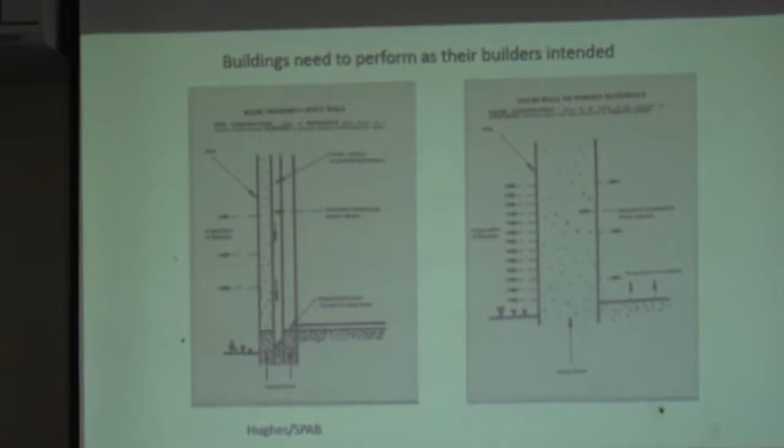What do you mean by capillary? Sorry, what do you mean by capillary closed? Well, they put in ingredients that disrupt the pore structure so water will not move out by capillary action, typically it will stay there. And what is vapor permeability? Well, the movement, the idea that a water vapor molecule will pass through a porous material, which in and of itself defies the laws of physics.

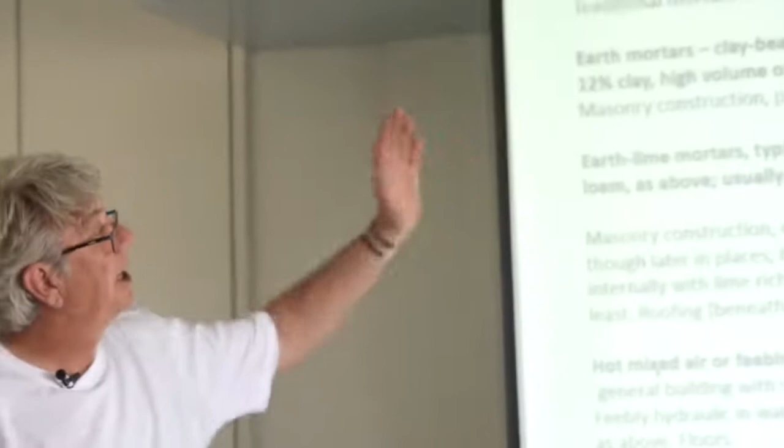So this is quite an important thing, but this would be my summary of the traditional mortars in a general sense. Obviously earth mortars, very common over millennia—clay-bearing subsoils, improved, I still use that word, with well-tempered loam, improved with sand typically to reduce the clay content and the shrinkage. Typically about 12% clay, with a very high volume of silt, which I believe is as important to performance as the clay. Used for masonry construction, plastering, daubing—if you plastered with mud, it was called daubing in the UK—and floors, perhaps with additives, often without.

More particularly, a mortar largely ignored by the conservation industry in the UK until recently is earth lime mortar, which has a small—typically small, but not always small—proportion of quicklime added to it. This transforms an earth mortar, which is not a bad mortar, into a wonderfully workable, cohesive, adhesive, and much more water-resistant mortar, but also very high in its capillarity—a very optimal capillarity. And that's for the same purposes.

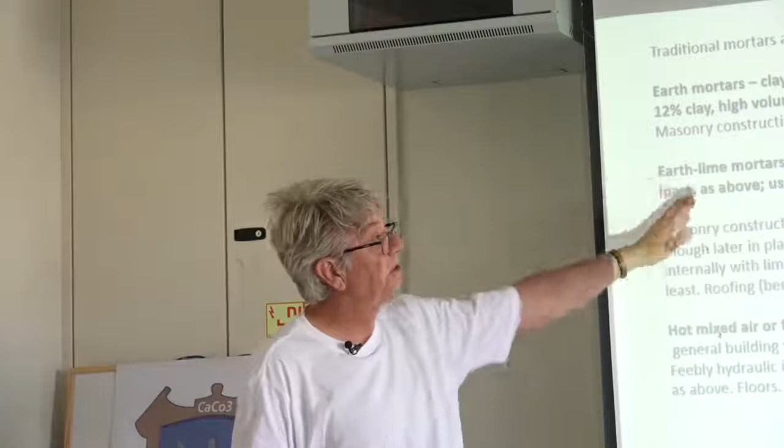Most stone buildings in the United Kingdom built before 1800 were built with earth lime mortar—the bedding mortars are earth lime mortars. In terms of historical time, there's no question the most common masonry mortar is earth lime mortar, not lime sand mortar. In terms of surviving volume, we have a high volume of buildings built with lime sand mortar in the UK because they're newer. But if we mean historical time, this is key—this is the typical Roman mortar, Norman construction, and all of these things. It's the most common mortar.

But in most cases, almost universally in the masonry trades, you don't just leave that, although it is incredibly durable on its own. It's pointed with a very lime-rich mortar, often a pure lime and hair mortar, or a lime and limestone dust mortar, or a stone mix, but always with more lime than aggregate. So those are very common.

Then we come to hot mixed lime. Understand the definition: an air lime, a fat lime, a pure lime—they're all the same thing, but the current European nomenclature says we should use 'air.' Historically, natural hydraulic limes were called water limes. So, air lime, water lime—it tells you where they belong. Fat limes belong in the air; water limes belong underwater or underground, where fat limes will not set. Simple as that, because they rely on carbon dioxide.

Hot mix and these earth lime mortars were displaced for building in the UK after about 1800, sometimes after 1850—it varies around the country. Then you've got a whole system built with hot mixed lime mortars, very lime rich, never leaner in use than 1 lime to 2 after slaking—never leaner. One of the biggest mistakes we made in the lime revival was to mix 1 slaked lime to 3. That's a non-existent mortar historically. It does not exist.

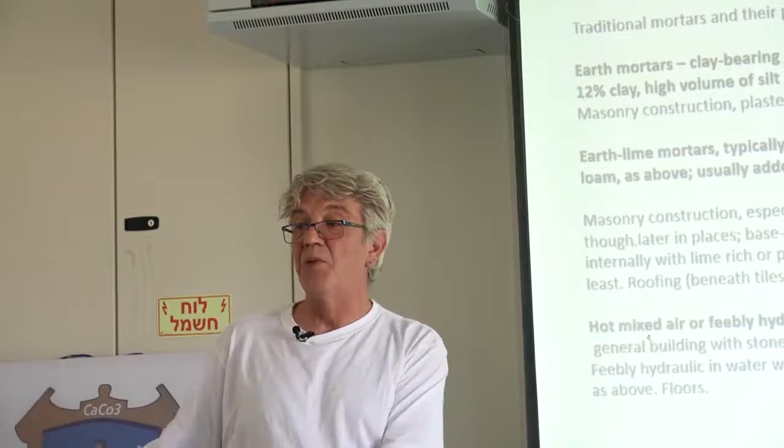They are only ever, the leanest they are likely to be is 1 to 2, and they'll only be richer in lime than that, not leaner. That is essential. It's why lime putty got a bad name in the UK and elsewhere - not enough lime. We thought we knew better, ignored thousands of years of history, and put half as much lime as they ever did into the mortar, then wondered why it doesn't quite work. That's modern arrogance, isn't it? We know better - but we do not know better in the case of lime mortars. We really do not know better.

So, and they are all universal. I would hazard that 95% of building mortars in the UK until around 1910 were made by this method, by a hot mix method, and from quicklime. So them, and then putty lime.

Now, shock horror, this was a shock to me. Putty lime slaked with minimum volumes of water, very differently slaked actually to the way it tends to be slaked today. I think I would call modern putty lime yogurt - lime yogurt, maybe Greek yogurt to be fair, but that's about it. Lime putty, when described historically, is always described as being of a bread dough consistency. I think we can see that's a different material.

And the difference comes from the method of slaking, as it does in all of these things. That was used on its own as a mortar, not as a binder - it was distrusted through time as a binder. This is a shock - to me it was too. I didn't expect that.

So in the 20th century it did become commonly used, but typically because they knew they were going to gauge it with Portland cement. If you make a cement lime mortar with lime putty, it is beautifully workable. If you make it with hydrate, not nearly so workable. So it was used for the finest joints in stone ashlar, the finest brickwork joints, and for the finish coats on lime stucco.

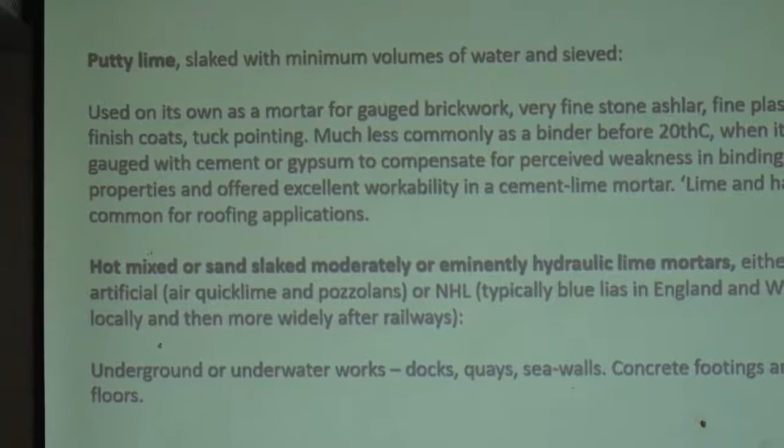So that's that point made. Lime and hair, but for roofing applications - but again, that was slaked and used immediately. In most cases, when they used lime putty, they would slake it and use it within a week, not 3 months. Their belief was the longer you laid lime putty down for, the weaker it became in its binding properties.

And there is modern research that indicates that that is true. You'll see that with the hot mixes, the bond within the mortar is completely different. It's a very tenacious bond within the mortar as you're using it, as you're making it. Very different. So it's not a bad material.

I mean, if people want to carry on using lime putty on historic monuments, great. It's a very sacrificial material, but I think in masonry terms and craft terms, maybe a little too sacrificial, perhaps, you know. It lets more water in, particularly when it's too lean in lime.

And then we've got hot mixed or sand slaked, moderately or eminently hydraulic lime mortars. I would say right now that a modern NHL2 is not a feebly hydraulic lime. By historic definitions, by Vicat's definitions, he would have called a currently available natural hydraulic lime an eminently hydraulic lime, okay? Where that leaves NHL5, I don't know. But as you will see later today, in many of the brands, the NHL2s are the strongest, not the 5s. This is one of the problems - you don't know what you've got in that bag.

But they were used underwater. Our blue lias, which was considered the hardest natural hydraulic lime available for engineering works, that was 72% free lime.

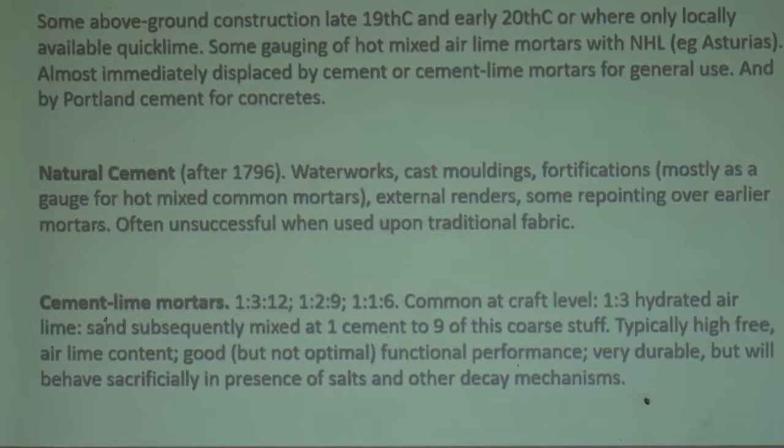But I have to say, the evidence of all my research is that the only purpose for which natural hydraulic lime was the preferred binder in the UK, and in Europe generally, was to make concrete. That was the only purpose that they preferred to use it for.

So for those conservators, and I'm one of them in the room, we have to ask a simple question: why have we spent the last 25 years covering our buildings with a material that historically, and still at the end of the 19th century, they considered to be only appropriate to make concrete floors and concrete footings of buildings, and rammed béton in France, rammed concrete structures? I'd leave that question in the air.

And then natural cement after 1796, but that again wasn't used for building. No mason would use that to build a structure with. That's far too hard, far too fast setting, but it was useful for waterworks because it does set underwater very quickly, and mainly for cast mouldings.

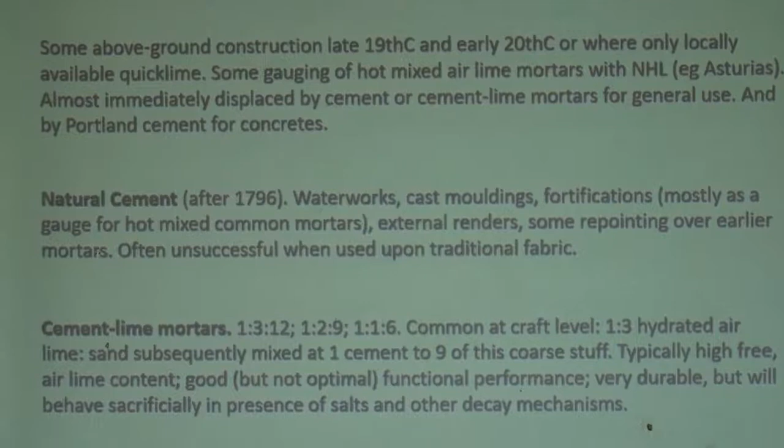American engineers liked it for fortifications, but they were building these during the Civil War. They needed them built and strong from the moment they were built. They didn't have time to wait. But even then, they used hot mix mortars, generally lime rich, and they would gauge with natural cement to speed that initial set. Never use it on its own for that purpose. But they would often point with it on its own.

And we are in the period where I believe we do need to consider cement lime mortars to be historic mortars, and that where they exist and where they're causing no damage, which they will rarely do, in my observation—a 1:2:9 or a 1:3:12, 1:1:6 is a different matter, perhaps—we need to be working like for like with these materials.

So in Tel Aviv, we've got very successful cement lime mortar work that is being displaced by other mortars. Why? The like for like material is cement lime. And a typical cement lime, or a 1:2:9, has 66% of its binder as air lime. There is no natural hydraulic lime on the market that has that much free lime in it.

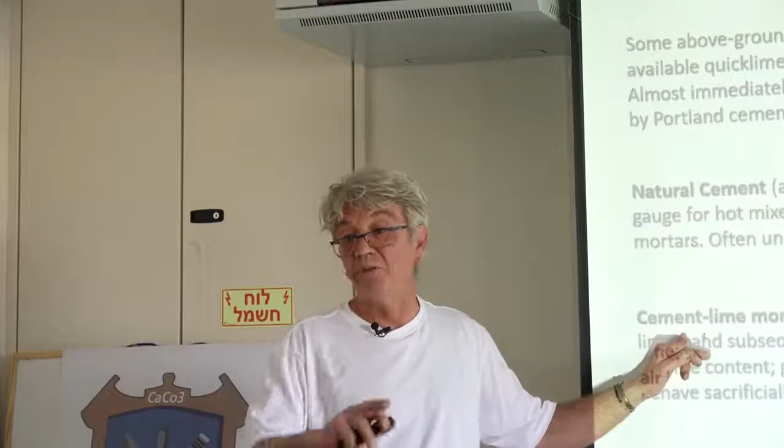And the other thing to say, as I will demonstrate later, the key issue with natural hydraulic limes—one of the key reasons they were never used for building unless they had no choice historically—is that they are an inherently variable material, not only between sources, but within the same quarry. They vary in strength all the time from one day to the next. Portland cement, which is mineralogically... put it another way, a natural hydraulic lime is actually a weak cement lime mortar. That's what it is. It should be, in my opinion, called a natural cement lime mortar, not a natural hydraulic lime mortar.

But they are predictable. We know exactly what the strengths will be. We also know that a typical cement lime mortar will reach maximum strength after 3 months, not after 10 or 20 or 30 years. We know pretty certainly that NHLs will gain strength for 10 years at least after they've been in a wall, and on it goes. We don't know.

That's the whole point, we don't know. Isn't that the basic rule of conservation? We don't use materials that we don't know the potential of, the consequence of. So we need to take these seriously. They are well-performing mortars, and they were designed to be exactly that, initially by the United States Bureau of Standards, who recognized the need for as high a free lime content as you could get, but compromising with modern building technology and the demands of the modern building industry that did demand rapid early initial set. That's all it's about. They're often weaker than if you used a straight pure lime mortar. 1:3:12 is unquestionably weaker than a 1:3 hot mix lime mortar with no hydraulic activity at all. But of course, the hot mix will take more years to get to that strength. That's the difference.

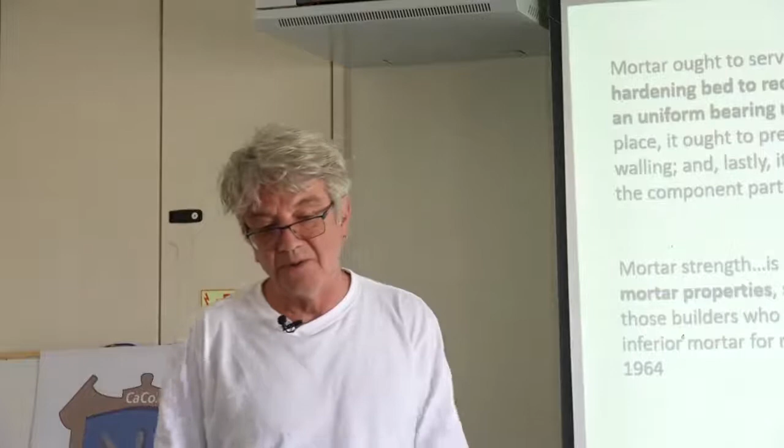So, okay, I want to initially go through—forget all that, this versus that. What we actually need to look at is what mortars are actually for.

What does a mortar need to be to do the job that is asked of it?

Looking at historic understanding of this, mortar ought to serve at least three purposes: to form a soft but gradually hardening bed, critical, to receive the various building materials so that these shall obtain a uniform bearing notwithstanding the irregularity of their surfaces. We'd add now that a soft but gradually hardening bed is essential to the formation of the bond with the substrate.

In the second place, to prevent the passage of wind and rain through the joint. Even the US Bureau of Standards acknowledge that the mortar that will keep the building driest, that will resist rain penetration most, is a pure lime mortar, because it makes a proper durable bond that prevents water getting in. And the more hydraulic that mortar is, the less it will resist the penetration of water.

Counterintuitive, but that's all to do with bond and the quality of the bond that is made.

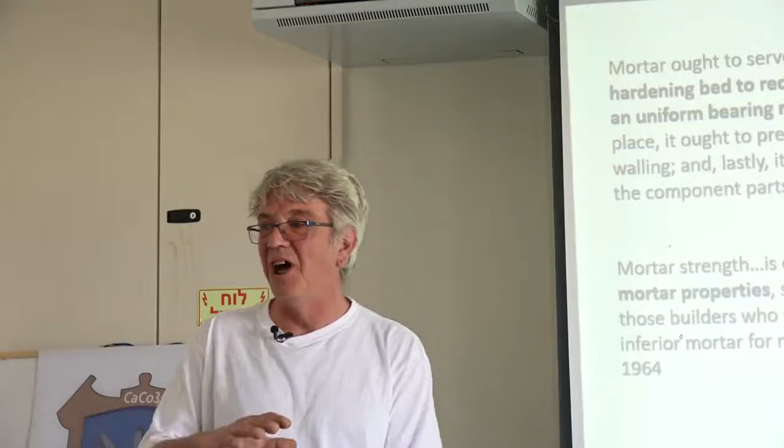And lastly, to have adhesive and cohesive strength enough to bind the component parts of the wall into one solid mass. Not, as some engineers frustratingly say - even friends of mine - that the purpose of mortar is to hold the stones apart. I'm a stonemason; you can build a wall dry and it can still be structural, but it won't resist the things we want it to. So mortar is to hold stones together, not to hold them apart. That gives quite a misleading impression of what mortars are for.

Moving to 1964, Robert Boynton, American chemist - any work by him is fantastic - wrote that mortar strength is often greatly overemphasized to the detriment of other essential mortar properties such as workability, water retentivity, and bond strength. He doesn't mean strong bond strength, he means appropriate and full extent of bond. Those builders who strive for high or maximum mortar strengths usually obtain inferior mortar for normal above-grade construction. Again, we're talking largely about above-ground construction.

In the UK by the 1920s, it was asserted that you could not build a building with fat lime mortars, ignoring the fact we'd been doing that for 2,000 years at least. That was propaganda, ideology, all sorts of things. But the US Bureau of Standards were unusual in that, as long as the wall was thick enough, they were quite happy for it to be built with a pure lime mortar, no hydraulicity at all.

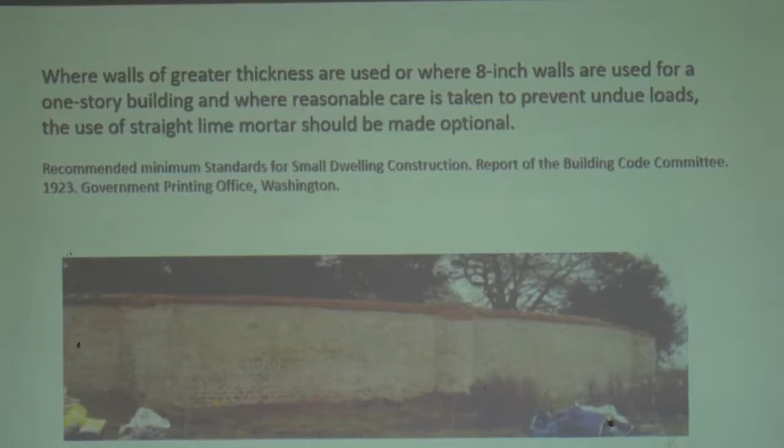This wall we rebuilt with just a 1-3 hot mix, no pozzolans. The only thing that stopped me building it faster was the time I had. Hot mix mortars receive the stone and stiffen to load-bearing almost immediately, so you can just keep building. You shouldn't go too high in one go for structural reasons, but you could build the whole thing in a day with hot mixes if you had the people to do it. That's a huge quality in a building mortar.

This is dry. There's a bit of green there, but that's because we'd just taken away the scaffold that had been there all winter. The scaffold was hay bales - a big arrangement - so it had been holding moisture against that wall, but it's very dry now.

More surprisingly perhaps, this is the modern ASTM international standard for mortars: workability is the most important property of plastic mortar. Workable mortars can be spread easily with a trowel into the crevices of the masonry unit. Workable mortar also supports the weight of the masonry units when placed and facilitates alignment - pretty much what's just been said. It adheres to vertical masonry surfaces - you butter a perp joint and the mortar actually stays there. What a revelation, instead of just falling straight off again. So you can press your next stone into that mortar rather than trying to retrospectively fix it, which people often don't do properly.

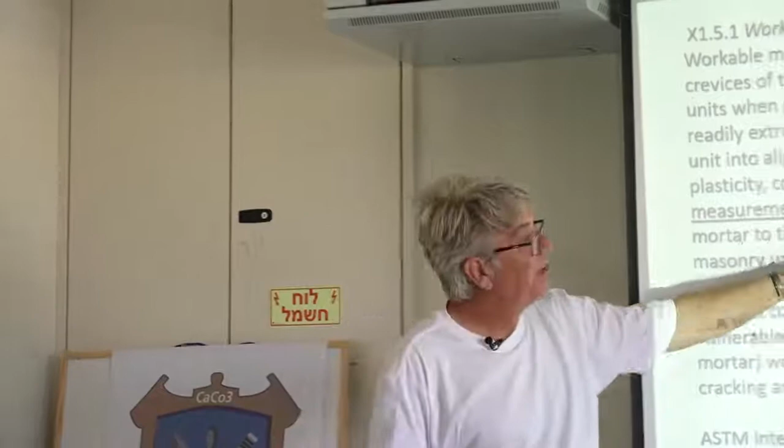Beware of this, it's very, very common. And I like this line: the mason can best assess workability by observing the response of the mortar to the trowel. Good workability is essential for maximum bond with the masonry units. I think a lot of professionals don't understand that workability is critical to everything. They think it's just something nice.

We've got lots of conservation firms in the UK, masons and others, who have never used anything other than natural hydraulic lime. So they don't even know what workability is, because theirs are not workable mortars, in my opinion. They feel like sand and water on my trowel. That's not a workable mortar. They feel like cement, the same.

I'm coming to why that is, but so a wall containing, this is again the ASTM standard, a modern straight Portland cement sand mortar would be strong but vulnerable to cracking and rain penetration. A wall containing a straight sand-lime mortar would have lower strength, particularly earlier strength, but greater resistance to cracking and rain penetration. This is the modern American standard.

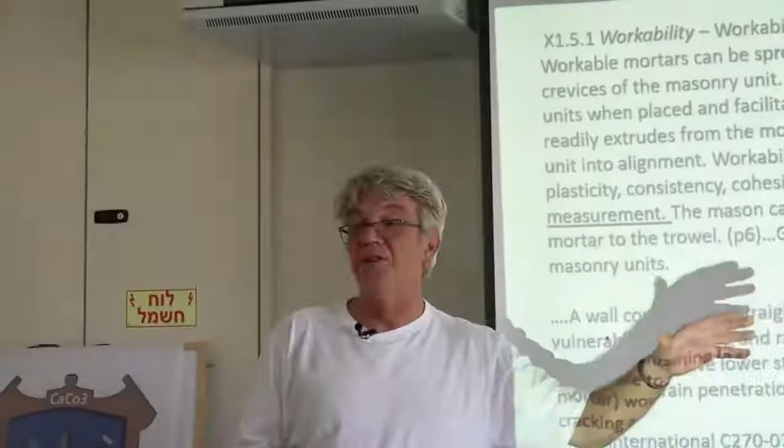Here we are over in Europe and the Middle East, we somehow think we know more than the Americans. I'm telling you now, in terms of standards and mortars, the Americans know far more than any of us, in truth, their essential nature. And that is the legacy of the United States Bureau of Standards research done back in the 1920s and 30s.

That's still running through the buildings industry in the USA. I'm not saying they do this, I'm saying they understand the importance of it. Now, why is workability important? It's not just something nice to have, because workability indicates the key property of water retentivity, which is the resistance of the mortar to letting its water go straight away into the substrate or into the air. And if you don't have water retentivity, that happens.

We know NHL mortars dry very fast. In doing that, they tend not to have made a bond, because the water, and they are hydraulic, so their set relies on water. You put a porous brick to a non-retentive mortar, it will suck the water out of the junction straight away, and that mortar at that junction will not set properly, ever. And it will leave a capillary pathway for water to run through.

The other thing is, if they're not water retentive, cement will make a strong bond, but only here and there. It leaves gaps, it doesn't make a bond everywhere. The US Bureau of Standards went through this ad infinitum in the 20s and 30s because they were trying to understand why their brick buildings of solid wall construction in America were leaking like sieves for the first time in history, having just been built with cement sand mortars.

The absence of workability affects workmanship. The absence of water retentivity prevents their ability to make a proper bond and a full extent of bond. A water retentive mortar does make that bond because it's slowly letting that water out. And suction, again, with 25 years of natural hydraulic lime use, we kind of see suction from the fabric as our enemy.

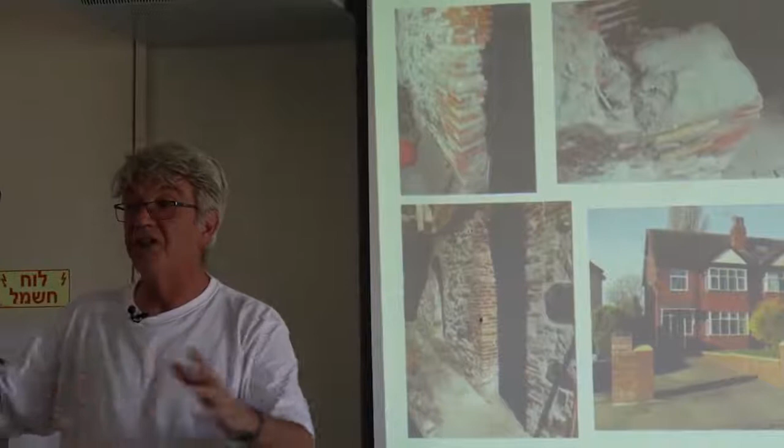And to a lesser extent, but to a relative extent, NHLs are exactly the same. And I did do it - I rebuilt it with a hot mix there, and so on.

And the other thing that they talk about, and that Boynton talks about, is the durability of the bond. Not that the bond is durable in frost and all that, but that once that bond is made, it doesn't break, that it stays there.

And this is a cavity wall construction, 1950s in the UK, so 1950s, hear that date. There is a hot mix air lime mortar that it was built with. It's in perfect order. That recession is not erosion, that's just the style by the 1950s - leave the mortar back a bit. And that bond is fully intact. And that building is dry.

This one next door, built with the same materials but repointed with cement, is permanently wet. This one is permanently dry, and that's the difference.

Another reason - even if they haven't made a proper bond, a mortar without water retentivity will break its bond because if it's hydraulic, because of the nature of hydraulic materials, every time a cement or a highly hydraulic material gets wet, it expands a little bit and then it shrinks. It expands and it shrinks, and it does that in every rain cycle. It also does similar in every thermal cycle.

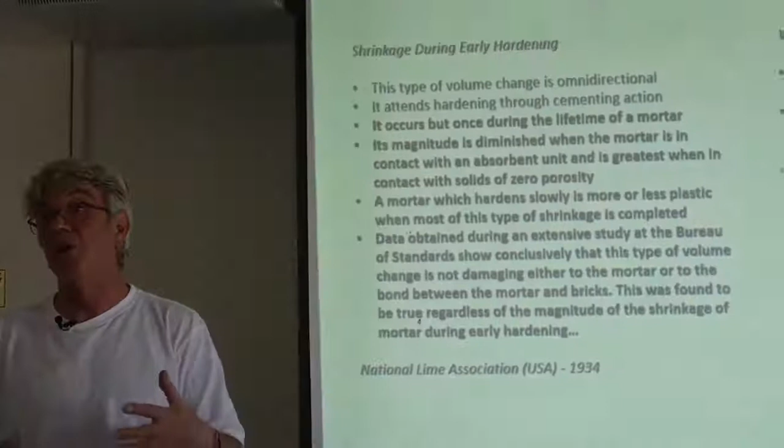And typically it doesn't shrink, that doesn't move forward - it's a lateral shrinkage pattern. With hydraulic materials, and of course relative to their hydraulicity, they demonstrated, and we know this, we all know this, we see cement renders full of cracks. That's not because of mechanical movement, that's because of the nature of the material.

They will shrink up to 4 times that same volume that we get in a fat lime mortar in their lifetimes, but only after they have set hard, when there's nothing you can do about it.

So I said earlier, I just want to say, well, these are what we do with these mortars, these are what they're for, which mortars actually meet those criteria. And I have to say, in summary, I'm not sure I've finished yet, but in summary...

Air lime mortars and hot mix lime mortars and fat lime, lime-rich mortars - doesn't have to be a hot mix. That's not essential, that's just the most efficient, economic way of making the best mortar in the world, that's all. So I'm not biased, but they don't have to be.

So that's where we need to hold these mortars up to these criteria, because the purpose is surely that the building doesn't crack and that it is dry most of the time. That's what they are supposed to be, isn't it? We've forgotten what they look like in Britain.

And just an extreme example of that, this is the Atlas fountain at Castle Howard. Obviously we didn't use hot mix air limes when we repaired this building, but in 1982 they filled this - on the elbow of this Triton here - they filled that with a neat cement. Logical, it's a fountain, you have to use neat cement, and the expansion and contraction of that in what we can't deny is a very wet environment.

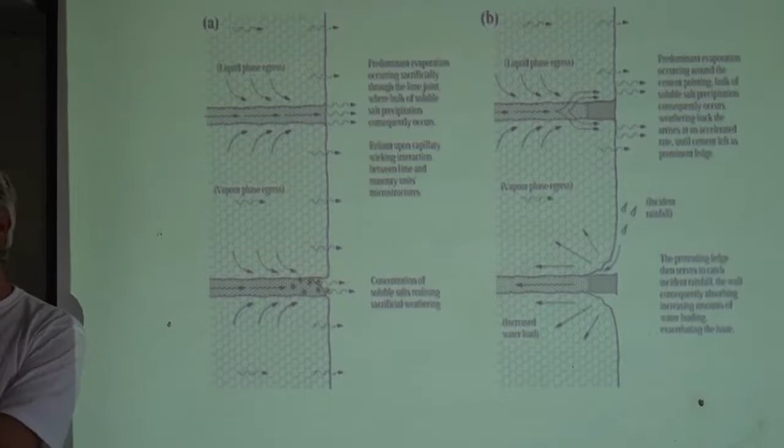This is David Wiggins, the engineer who's one of our gang. But if you plug that, what we need to happen is any water hitting that building - and the thing about capillarity - the air pressure within that pore structure will resist the penetration of water beyond about that limit.

So in a capillary active mortar, received water cannot get very far. And all of us who work on building, we know this to be true, even if we haven't taken it on board. We spray the old mortar joints, if it's NHL, for as long as you possibly can to give yourself some insurance against it drying too fast. And if we dug in with a mortar pick, we'd see the water has only gone that far - we could have stood there with a hose pipe for an hour, it's still only gone that far because the air pressure within resists. This is physics, not theory, not opinion. These are the fundamental laws of physics.

So that's what we're seeing in operation. Water going in here, but water is received in other ways too. If it's in the wall, it needs to be got out as quickly as possible. So with a bigger pore size distribution, it's going to want to go into the most capillary mortar part, and that's the definition of sacrificiality - any salts or whatever are captured in the face of this mortar. But it needs to be capillary active for that to happen. It's not enough to put something in and say 'oh, we'll resist the salts' - they're still there, and they're going to come out through the stone if they can't come through the mortar.

So we all know this, don't we? But sadly, the materials we're using don't kind of know it sometimes. So this is the thing.

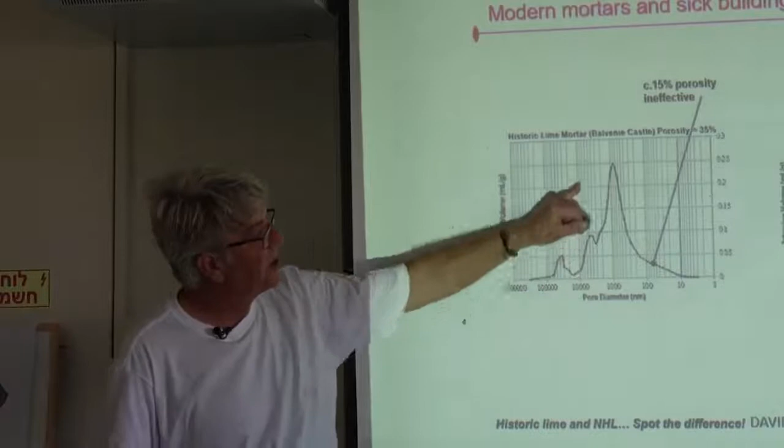So this is a graph of the pore size distribution in a historic hot mix lime mortar - very high domination by 1 micron pores on either side. This is an NHL 3.5 pore size distribution - here are the 1 micron pores. I'm just going to ask you to compare the relative volume of those capillary active pores in that mortar.

And of course, St. Astier used to - I don't think they do anymore, funnily enough - but they used to have on their adverts 'low free lime, low capillarity' as if that was a selling point, a good thing. It's a really bad thing, but they're not wrong - theirs is, as I say, the softest on the market, actually. So this does get worse, prepare yourselves.

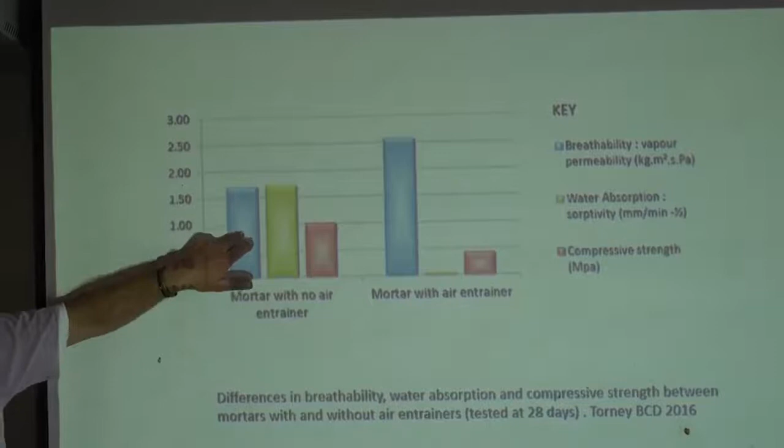And as this graph shows, here we've got capillarity and vapor permeability, which is something to be demonstrated in the lab only, but has been used.

Chemical additive? Yes, it was soap, basically. Builders used to use washing up liquid, because it creates big bubbles. Which they say makes it frost resistant, because the expansion of an ice crystal is smaller, but the trouble is, water loves to sit in big bubbles, in big pores. It'll put its feet up and read the newspaper. It doesn't want to get out, whereas it wants to get out of a very small pore.

So this is just showing what happens when you add air entrainment. It increases vapor permeability in a laboratory. I mean, the test is entirely false. They suck or force air through a porous material, usually with a vacuum on one side. Well, we don't live in a vacuum, okay?

And then they say it's breathable. No, because vapor cannot move of its own volition through a porous material. So that's the capillarity, that's the vapor permeability.

I should say, if it is about vapor permeability, which it isn't, a typical hot mix has twice the vapor permeability of any other mortar in the world. So if that's all it was about, they're twice as breathable. But we've increased the vapor permeability, which means nothing, won't work, won't dry the building, and we have all but eliminated capillarity. So that is a major problem.

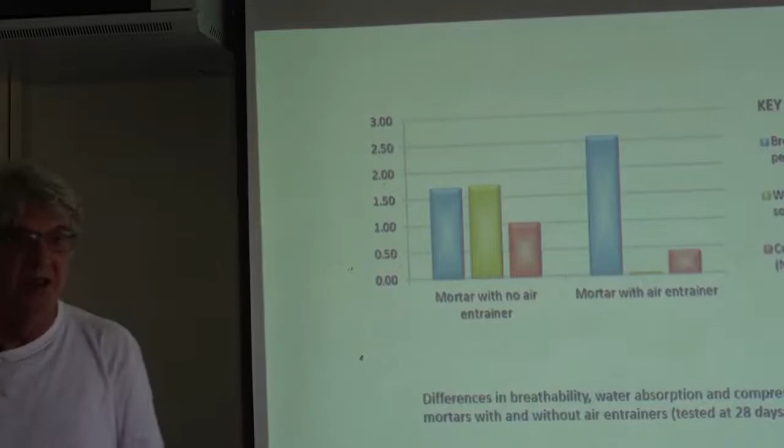And most masons in the UK put air entrainment into NHL mortars, not for frost resistance, but to try and get at least some workability in that bloody material. I don't know a builder, an ordinary builder, who does not hate natural hydraulic lime. It seems in Britain the only people who love it are the conservators. Ordinary builders despise the material, not because it's lime, but because they recognise all its problems.

That's why they did it, to mitigate. And they are much more breathable and much more capillary active, because all of this workability, real breathability, as in capillarity, all comes from the free lime in that mortar. That's where it is. It's not in the sands. Some engineers say vapor permeability is in the sand, but it doesn't work. It's the lime that gives the properties that we need, and the more of it you can get, the better.

Because of the pore size? They didn't know that, the US Bureau of Standards, but that makes the better bond and everything else.

So let's just have a look at a few examples. This, grade 1 listed, very important building, pointed 3 years ago with natural hydraulic lime, soaking wet all of the time. This humble little building, pointed by a local builder who's never used lime before in his life, but likes to use hot mixes, as is our experience.

Ordinary builders love hot mixes once they've discovered them, and once they trust that they will be durable. That's all they need to know.

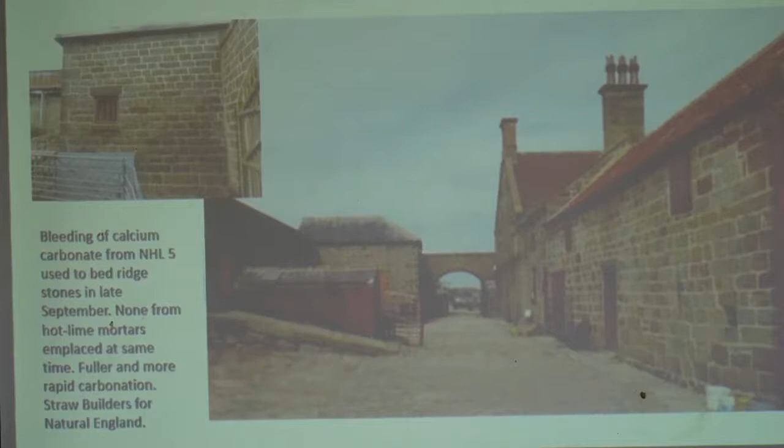We had bleed out from, the only place we used natural hydraulic lime was in the ridge. And of course, we're losing a lot of the free lime there because it's bleeding out, which is the typical pattern. The hydraulic set interferes with the carbonation set. There's no question, and so it delays it. But, and so that's that.

And these buildings had never been repointed with cement. They're earth lime built. I didn't perceive them to be especially wet myself, you know. That's that part of the range a year later. I mean, they were wet.

And that again is illustrating the dynamic nature. They didn't have Portland cement, but there wasn't lime pointing at the face. And you need it at the face so the wind can activate the capillarity. So it's a dynamic system. This isn't a passive system. This is a dynamic system when you use these lime-rich mortars.

And another example with NHL, four years ago when I did all these photos, this building is wet all the way up. And I think the guy who was mixing it just forgot to put the air entrainment in, perhaps, is all I can say.

And again, what are we going to do? What are we going to do? I did several things. I chopped out the NHL in that zone.

This was taken the next day. So the day after I'd released the capillary active mortars again, that they could get to work, those bricks dried overnight. I did a panel here across the capillary rise, so I couldn't be accused of cheating. And again, when I went in the next morning to dress that mortar back, the bricks in that zone were dry. So this is a shocking thing in a way, and the same there.

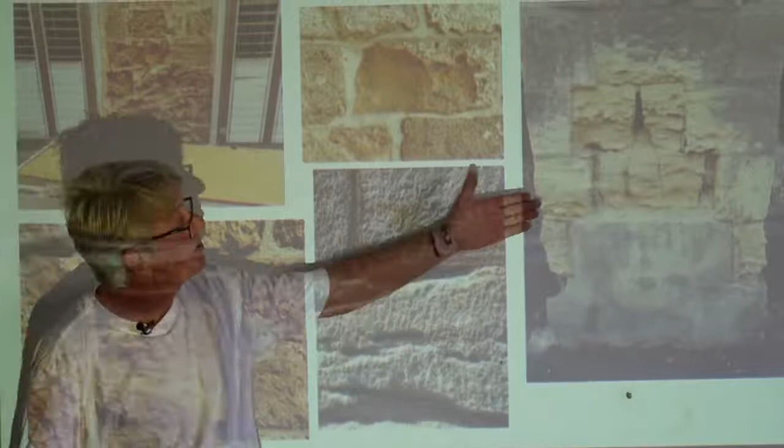That's in Moulton. This is where I live, around there. The only part of Britain where we have a calcareous sandstone. And this is in Acco, pointed with NHL, we understand, or premixes.

The biggest problem with a lot of premixes is that they have air entrainment added. There's nothing you can do about it. They add it in there, and water repellent usually. Both of those things will destroy capillary activity. It eliminates it. So you might as well be pointing with plastic, is the truth of the matter. Except plastic wouldn't make a great bond. But anyway. So this is what we expect.

Salt degradation. This is sacrificial behavior in the calcareous sandstone as a result of pointing with an inappropriate mortar. I'm not here to condemn, but I am. Of course I am. Why do I pretend, you know? But I hope it's based on evidence, yeah? And observation and experience. But that's just a little local example.

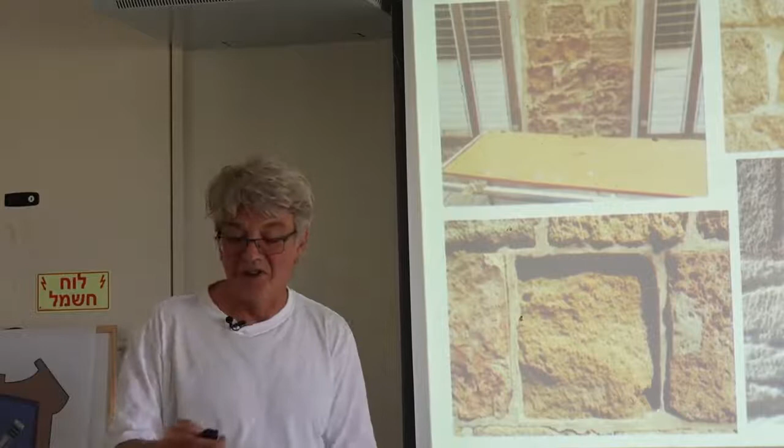Right, okay, so let's start looking at actually the mortars they used. There's Batty Langley, London, 1750. There are several kinds of mortar used in buildings, eight of them. So inside and outside mortar made of lime and sand. Now that's the general mortar. That's for most things.

Terrace mortar, which means trass mortar, they spell it all sorts of ways. Trass is a volcanic ash from Germany that has been the most commonly used for hundreds and hundreds of years in Britain and in Holland and everywhere else for underwater works, for waterworks.

Brick dust mortar, again a pozzolanic mortar. Bastard terrace made of blacksmith's forge ashes. You know, you've got iron, you've got fuel ash. These are all things that will give pozzolanic reaction, yeah.

Pargeting mortar made of lime and horse dung. And horse dung was used largely because it's full of fibre. Yeah, so it resists shrinkage and so on. But this is inside chimneys, where lime plastering inside a chimney is not going to do very well because of all the pollution and so on.

Furnace mortar for furnaces, ovens, kilns, so anywhere where there's real fire. Windsor loam - Windsor is around London. Loam is clay-bearing subsoil, that's what it means.

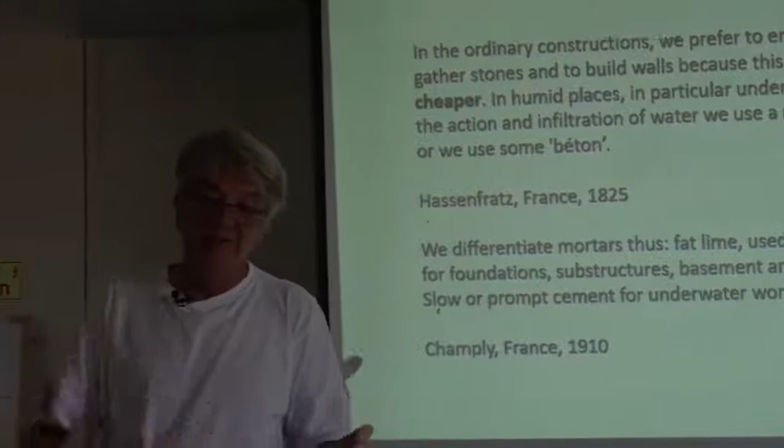So that's a British description of mortars. This is France—if you believe St Astier's marketing, France is the place where they've only ever used natural hydraulic limes to do everything. Completely untrue, as I will show you. But anyway, Hassenfratz, a French engineer, 1825. I should acknowledge that my apprentice Emma was from France, and in the course of this she translated many French texts into English that have never been in English before. So that's her contribution to this.

In fact, many of the French texts are the most enlightening, in truth—they went into far more detail about things very often. So in the ordinary constructions, we prefer to employ fat limes and sand to gather stones and build walls, because this mortar is abundant and cheaper, and it takes the most sand. We'll talk about that—the most sand is 3 parts to 1 quicklime, but that's what they considered a high sand-carrying capacity. NHLs were mixed at 1 to 1 or 1 to 2, never more.

Because in humid places, particularly underwater, wherever we wish to stop the action and infiltration of water, we use a mortar that hardens underwater, or we use some béton. Natural hydraulic lime is typically the binder in what the French call béton, but it's concrete—that's what it meant. You use the term here, don't you? I heard somebody say it. Yeah, bloody French, they get everywhere, don't they?

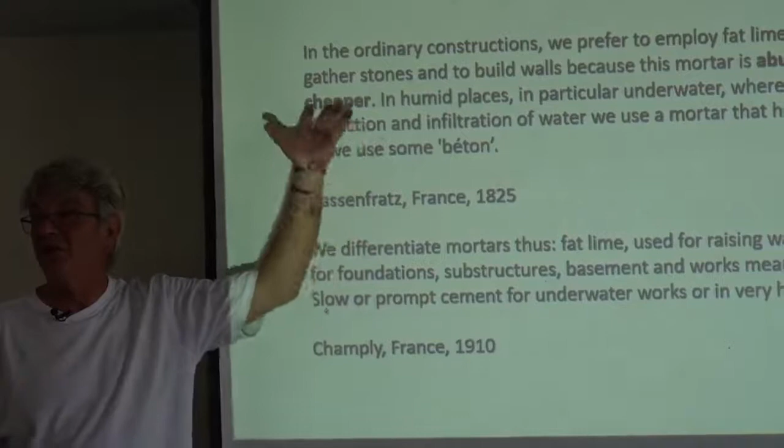But anyway, so we differentiate mortars thus: fat lime—this is Champly, 1910, not a long time ago. We differentiate mortars thus: fat lime, used for raising walls, so above-ground construction. Hydraulic lime, not necessarily naturally hydraulic, but hydraulic lime for foundations, substructures, basements, and works meant to be immersed, under the ground or under the water. Slow or prompt cement for underwater works or in very humid places.

Now, the distinction he's making here is calling Portland cement slow, as opposed to natural cement, which, as we know, sets hard in about 15 minutes—a nightmare to work with in many ways. You can add quicklime to slow that down. You don't need to add citric acid, add quicklime. That'll give you more working time and more workability.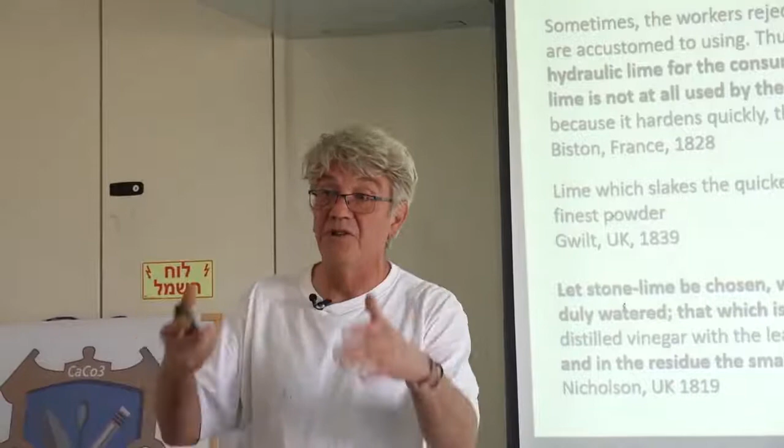But anyway, so those two quotes to me are the hierarchy of traditional building construction for most of history, and we're still obviously working then. And I said yesterday, and maybe this might be a place to pause—I fundamentally believe that traditional building technology, everything porous and capillary active, unless the stone itself is really hard and not porous, but of course the core of the wall, the mortars are, this is the best system of building ever invented.

And the full system, where we've got plasters of the same kind inside and a render, an exterior plaster of the same material, and a lime wash—that is the full system, and it's a brilliant system. It keeps buildings dry, that is thermally efficient, far more than we pretend. But of course, once that fabric gets wet, it starts to suffer problems, and it becomes thermally inefficient. It becomes all these things.

So I fundamentally believe—and of course these are sustainable—that's a sustainable architecture. It's vernacular, locally sourced, most of the time.

Anyway, again from France, and Emma, who's only ever known hot mixes, of course, and she is from Calvados—when she translated this, I got 'Wahey' in capital letters after, as she's translating it, because you see. But anyway, sometimes, I'd say every time, the engineers are campaigning for the use of hydraulic limes from Vicat onwards, for other uses, not just underground.

The crafts are resisting that campaign—that's the point, they're refusing. And this sums that up: half the lime kilns in the region of Calvados produce natural hydraulic lime, but it just gets spread on the farmers' fields to improve the fields.

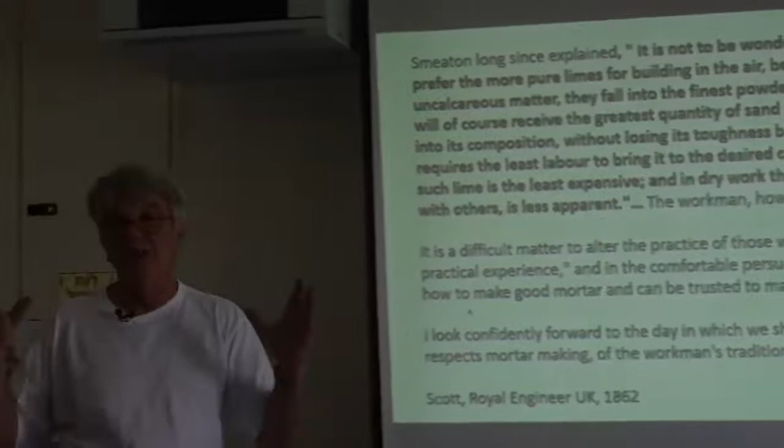And the idea that they didn't want it—I'll just end on this and we'll have a break. John Smeaton, brilliant. Read his book if you can get it: The Narrative of the Eddystone Lighthouse, one of the best books about lime ever written. He was something of a hero of mine. He's been quoted against himself here.

But Smeaton is saying: it is not to be wondered that workmen generally prefer the more pure limes for building in the air, because being unmixed with any uncalcareous matter, they fall into the finest powder, make the finest paste, which will of course receive the greatest quantity of sand—a maximum of 3 parts to the 1 quicklime, I would stress—generally into it without losing toughness beyond a certain degree compared to a hydraulic material, and requires the least labour to bring it to the desired consistency. It's the most efficiently prepared, and so on. Hence, mortar made of such lime is the least expensive, and in dry work above ground, the difference of hardness compared with others is less apparent.

This is—sorry, I normally swear there—this man, Henry Scott, a Royal Engineer who thought hydraulic materials were all you should use for everything, and who was, as so many in that period, utterly condemnatory of craft practice. Whatever they say: well, if the bricklayers do that, it must be wrong, because they're inherently lazy and idle. I'm going to tell you how you should do it. And that's a common thing that's going on in Britain after about 1860.

So he's saying it is a difficult matter to alter the practice of those who have grown grey in exalting practical experience, and in the comfortable persuasion that the bricklayer knows best how to make good mortar and can be trusted to make. This is just contemptuous sneering at the crafts. It's class struggle, that's what's going on.

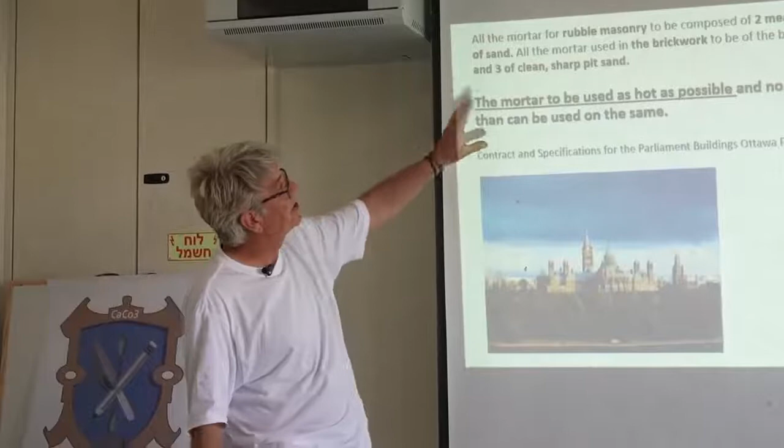And there are lots of lime premix producers now advocating the addition of latex to mortars - don't do it. But look at this spec: the mortars will be used as hot as possible, and no more mortar to be mixed in one day than can be used the same day. When you see that, you often just see that bit - no more to be mixed in a day than can be used that day.

This is the idea, common historically, that lime mortar is best when used the freshest possible after making. The longer you lay it down for, as with lime putty, the weaker it might become. Now, they might be wrong about that, but that was a firm, solid belief for 2,000 years - use it as fresh as you can.

You might interpret that as meaning it's hydraulic, but no - when they did use hydraulic limes, they're very clear: as soon as that starts to stiffen, throw it away, because the hydraulic set has started. If you knock it up, you ruin it. And if you knock it up again, as St. Astier told you to do over a 36-hour period, you might end up having knocked out a significant proportion of the hydraulicity.

So anyway, that's the Canadian Parliament building - they've just spent $2 billion repointing the west wing of this complex with a hydraulic lime that has 3% free lime in it. So they've wasted it, in my opinion. They will be back on that building in 20 years' time.

Okay, so earth mortars - we're going to scoot through this, but this is historic. At last, finally, the conservation world in Britain is taking earth and earth-lime mortars absolutely seriously. We have spent 40 years ignoring their existence, believe me.

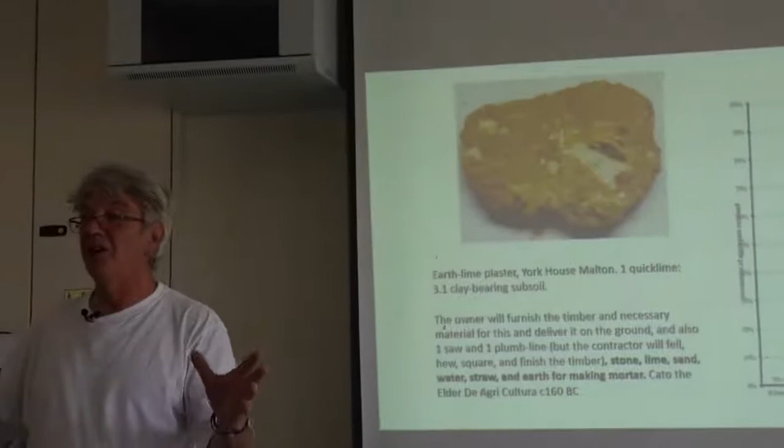This is a brief analysis of a typical earth-lime plaster from Malton: 1 quicklime to 3.1 clay-bearing subsoil - so that's actually quite lime rich. As Bill the analyst said, that is the only 1-to-3 mortar he has ever analysed in his life, because lime-sand mortars are never that lean. He's very accurate, Bill.

Whoever said that's pedantic, yeah, but essentially it's 1 to 3, more often no more than 10% or 20% lime. In Spain, most of the rammed earth structures that Valencia University have analysed have 10 or 20% lime addition. Who knew? But that's the case. It's because when you add a little bit of lime to an earth, it transforms that material into something completely different, far more workable, and all these things.

That's just some data, but a lot of these I just like, you're going to get this slideshow so you can read them. These are building accounts typically, and we only find earth lime mortars in building accounts, not experts - they didn't write about them, except the French, they did. So you can see the ingredients of an earth lime mortar being delivered to site there, and so on.

Spain, Valencia, just to give you an overview here: earth lime bedding mortars very much in Roman tradition, hot mixed lime pointing mortars over the top. Valencia in Spain - that's a 17th century merchant's house in the old city in Valencia.

This near us in York - this is the system we're talking about. Earth lime bedding mortars struck almost at the face, laid over with a little layer of lime. They're not hacking it back that deep. It's laid on like a localized plaster, and that one is just pure lime and hair, nothing else. But it's not hot mixed in the sense that we are talking about - it's essential that you slake lime putty in the right way to get the right material, and we don't do that today. I am in no doubt we do not slake lime putty properly.

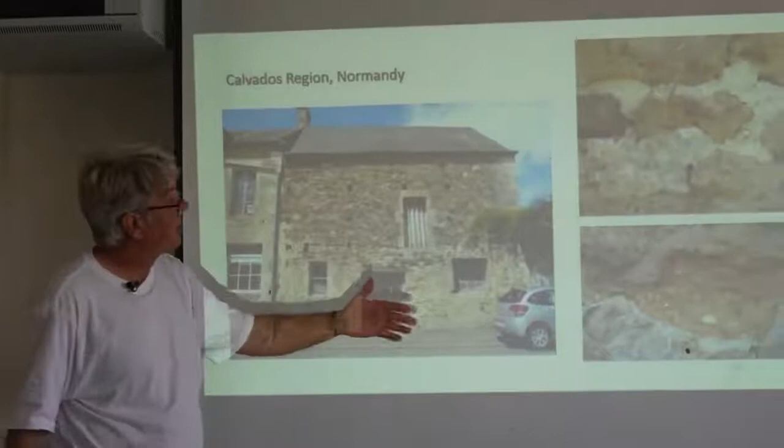Calvados in Normandy - all of these mortars could be in my village. They're in Normandy, but they could also be - they're exactly the same. We're looking at a universal material here, all around the world.

Asturias, northwest Spain, the same - earth lime bedding mortars, sometimes just clay. If the clay was enough, they wouldn't add the lime, didn't feel the need for it. But then dubbed out with a hot lime, plastered with the hot lime, and then finished with a hot lime wash, made from quick lime, applied when it's still hot. Very different material to what we think lime wash is.

And on timber frames in Britain, everywhere, the same system, except within the panels.

And in China, on the Great Wall, they've in recent years realized, well, maybe it wasn't such a good idea to use cement, even though we produce more cement than anywhere in the world in history. We're not going to use it on the Great Wall of China - we're going to use quicklime mortars and earth lime mortars. The traditional earth lime mix in China for most buildings, including the Forbidden Palace buildings, is 70% loam, clay bearing subsoil, 30% slaked lime. That's the traditional mix in China, and it's topped over with a very pure, very rich lime, if not entirely lime pointing. So it's the same system in China as it is in Normandy, as it is everywhere.

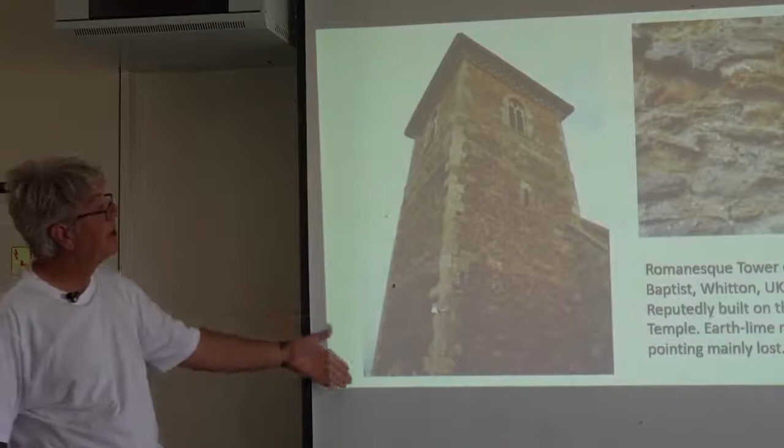And then, is this a structural material? This tower has been in Lincolnshire, in Britain, 1,000 years, and any mason I think would agree with me, that's a very plumb structure - plumb meaning it's straight. And the earth lime, the lime bedding, pointing mortars fell away for the most - they're still there in places, but they fell away long ago - and that has proved a remarkably durable material in the British weather, earth lime. So they don't need the lime really, they didn't know that, they didn't say that.

The lime is there to drive that capillary extraction, because it's the more capillary active material. So, repairs - this is our local church, Anglo-Scandinavian - we're deep filling with earth lime, which is what it was built with, then pointing with hot mix lime over the top.

And then this one - just put this in because there is some difference in use, not in performance in my opinion, between modern quicklime and traditionally burned lime. I burn in my little kiln, not for everything I do - I wish I could, but I haven't got the time for most of it.

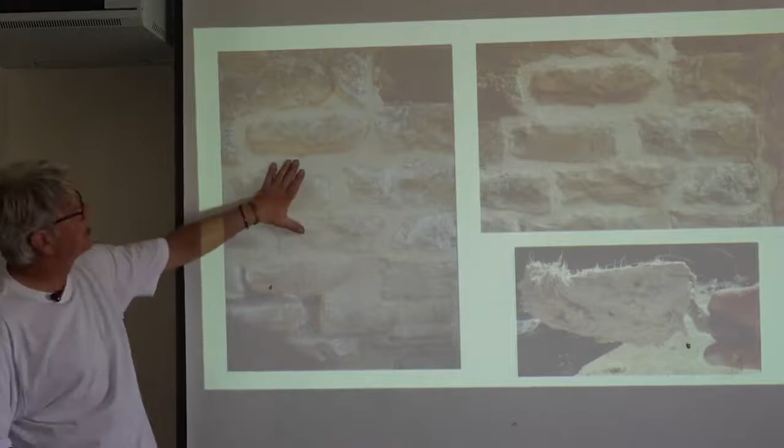During the first lockdown, I burned some local limestone, slaked it to a hydrate, and immediately mixed in hair - nothing else, no sand - and pointed the wall. That's just after pointing. This is within a week or two, carbonated on the face, not at the depth. That's an entirely durable mortar, and there's nothing there but lime and hair.

And the only aggregate is the little bits of grit around which the ooids formed on the seabed - that's the core they were rolling around, gathering calcium to themselves and becoming limestone in the end. This is the kind of stickiness we're talking about of a mortar like that.

What would you say would be the difference between your burnt lime and, let's say, an industrial one? Shrinkage is the key difference - there's more shrinkage with the modern one. We'll talk about this afternoon.

So if we look, this is what's been going on. When this all started, it was driven from below, but the heritage organisations listened and were open to this, and they got involved. We've got Historic Environment Scotland, Historic England, CADW - the Welsh equivalent - OPW, the Irish equivalent, Office of Public Works, and the Heritage Council of Ireland, all in a group to move this forward, to understand, to commission the research, to drive the research. That's ongoing. There's lots of research being commissioned so we can understand these mortars. For me as a craftsman, I know they're right, but we do need to have the data as well.

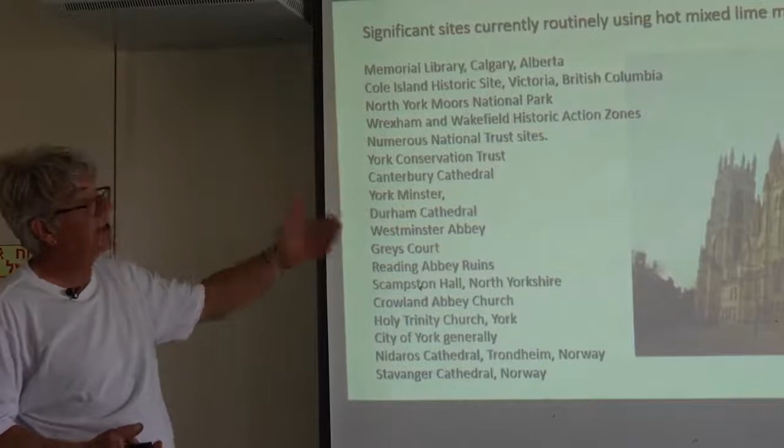Canterbury Cathedral, York Minster, that's York Minster. I said just now it was Lincoln Cathedral. What an idiot I am. It's not, I'm sure you knew that, did you?

But anyway, York Minster, I burn the lime for York Minster because they use a magnesium lime, as they did when they built it, and you can't buy that. So I burn their offcuts when they're doing the masonry, burn the lime. That's a nice circle, yeah, in sustainability terms. It used to just get thrown away, the waste stone.

Durham Cathedral, Westminster Abbey, Greys Court, which is a big grand place near London. Reading Abbey ruins was all done with that. Scampston Hall, another big grand house. Crowland Abbey Church, Holy Trinity Church, I did that, that's the oldest in York. City of York in general, although anyway. And more interestingly from a frost perspective, Nidaros Cathedral in Trondheim, the most northerly cathedral in the world.

And Stavanger Cathedral in Norway, where Emma, my apprentice, has been working now for 3 years.

Just a few little things. Unless he's a water juggler, that's steam, yeah? So that's hot mixing on a medieval site. This is hot mixing in Sweden. You can see the steam rising, and you can see also that it's being mixed, and that's going straight up to those guys to be used.

So no dwell times. I'm not going to dwell on this, but when I say I've been through building accounts, this, in a good case, is what you get. So this is for this house. It was before they later clad it in stone, but underneath is the brick building they're talking about here. And just look at the detail, there is no room for error in some of these.

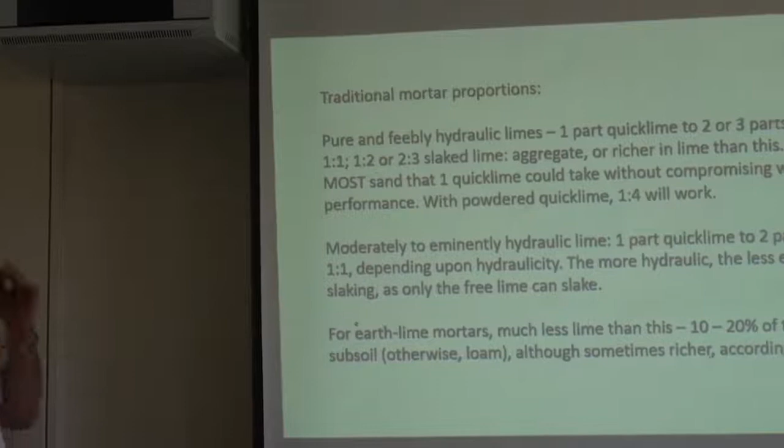So traditional mortar proportions, I've talked about that. What I want to make clear is you will very, very rarely find a lime mortar that is leaner than 1 lime to 2 anywhere in the world, and they're often richer than that. That is achieved by mixing at 1 quicklime to 3 typically, because although that's 2 to 3, on analysis, of course, there are lime lumps in there that are not binders. So in terms of binder terms, and whenever they specify slaked lime, whenever you see, in Britain anyway, 1 lime to 3 sand, that means quicklime.

They knew that, they didn't have to say it. But if they wanted slaked lime, they explicitly say slaked lime. And that is 1 to 2 at the leanest, yeah? So that's kind of what tells us what they're aiming for. Also for bedding mortars, like, yeah, all of them. Yeah, well, except when they weren't using earth lime, of course.

Hydraulic limes too were made from quicklime, but they do not expand anything like as much - sometimes not at all if they're eminently hydraulic. So they're mixing those at 1 to 2 as a minimum, as the leanest, and again we mix at 1 to 3. That's not right. It's one of the reasons they've got so little workability. You mix at 1 to 2, there's a bit more workability.

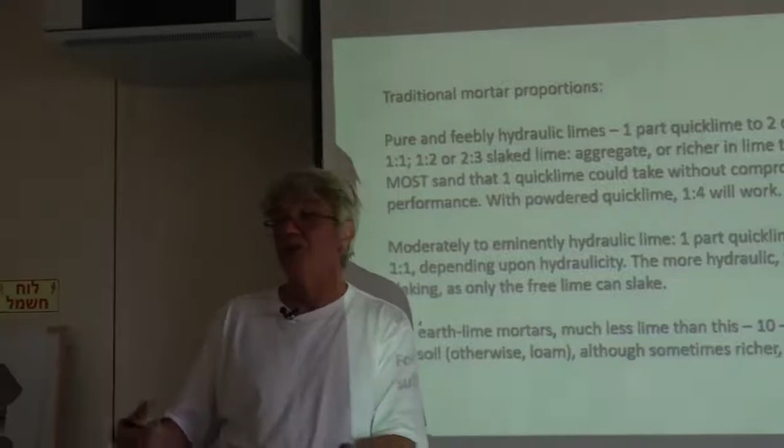And so for earth lime mortars, as I said, we've said 10 to 20%. Now these are all traditional slaking methods. I'm not going to dwell on those, those are for you to read later - primarily because we're going to be talking about them this afternoon with the materials in front of us.

It's just to show you that the ordinary or common method, and that's what it's called in every country I know, is the method used most of the time for most things. That's to reduce lump lime to a size you can mix with sand, that's all it's about. So the ordinary method: a ring of sand, quicklime in the middle, give it water - not the other way around - give it just sufficient water it needs, bank it over to slake for a little while.

The slaking of a pure lime takes 2 or 3 minutes - it's not hours, it's 2 or 3 minutes. As I say, the slaking of a hydraulic lime may be 12 hours, maybe 36. So it's a completely different thing.

Direct mixing powdered quicklime with sand - not as uncommon as we think. They did pulverize their lime, and they always say when they use it that it made the strongest mortar of all. I would say that is simply because it is all binder - there are no lumps, yeah?

Aspersion or immersion, that's just dribbling water on it - enough, just sufficient, as they always say, to slake it to a dry hydrate, and then you can make it to a paste, but after the slake is complete.

We'll talk about all this afternoon. Air slaking - just leaving it in the air to slake - that can take 6 months. They all talk about it and then go on to say, but nobody does that. You know, it's one of those things.

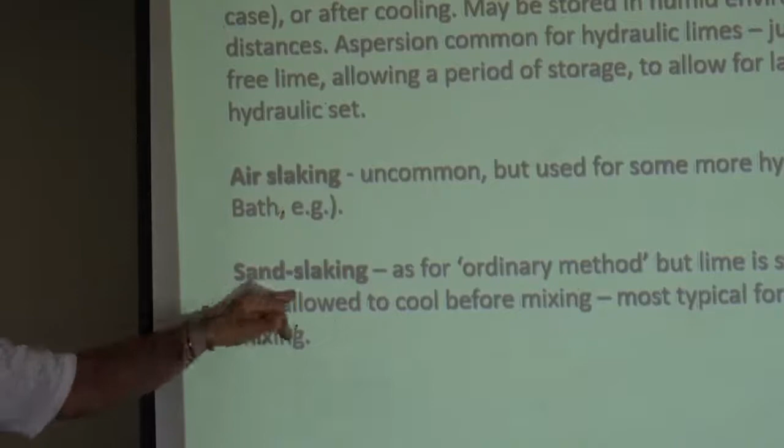And then sand slaking, which is that method but you let it all go cold. This has been much confused over the years by John Ashurst, by many people - they think that is hot mixing. But if you put that lime in the middle, give it the water, bank it over and walk away for a couple of days, and when you come to mix the sand with the lime, it's cold - that is not hot mixing, that is sand slaking. You're just using the sand as the container in which you slake the lime, that's all you're doing, to a cold material. Very different outcome in terms of workability and so on.

Just a little example from Chicago: a layer of sand, the quicklime, give it that, mix it to a mortar, put it out to sit ready for use. Simple process. And that's Chicago in 1924, okay, not in the mists of time.

Now this quote here, I'm going to dwell on this - 1703, another bricklaying book: 'When you slake the lime, take care to wet it everywhere a little, but do not overwet it, and cover with sand every laying or bed of lime, so that the steam or the spirit of the lime' - this is a mystical thing, the spirit of the lime - 'may be kept in and not flee away, but mix itself with the sand, which will make the mortar much stronger than if you slake all your lime first and throw your sand on altogether at last, as some do.'

This is not - we're not talking iron rules here - but this mention of steam is so common that this paragraph alone has launched, with the pre-research and now Historic England, a full-blown £40,000 research project into what happens when you slake with steam. We know that what happens is something different - in that method you're not only slaking with liquid water, some of the slake has been done by steam, yeah? And that's significant - steam makes different bonds, I'm told, by the chemists and the physicists. So yeah, that's all significant.

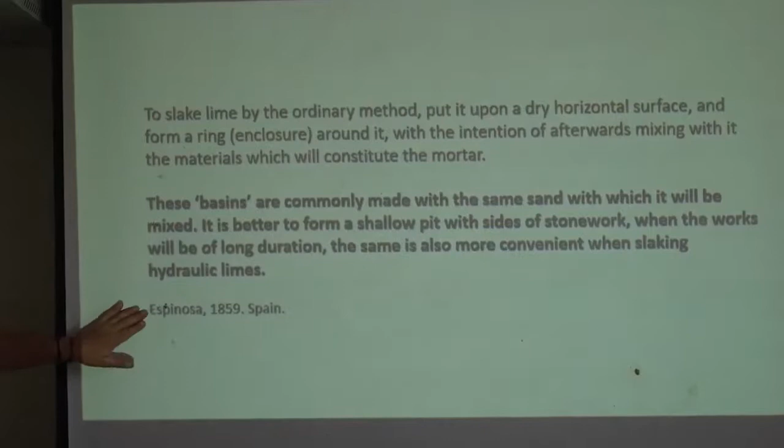I'm not going to dwell, but this description is the same in France. This is a guy in London, but he was Irish. This is a description of powdered quicklime mixing, which is a different method, but we're going to do that this afternoon. And this is from Spain, again, ordinary method, exactly the same. I'm confident these methods are the same everywhere in the world, because they're driven by the material, by quicklime. That's what it demands.

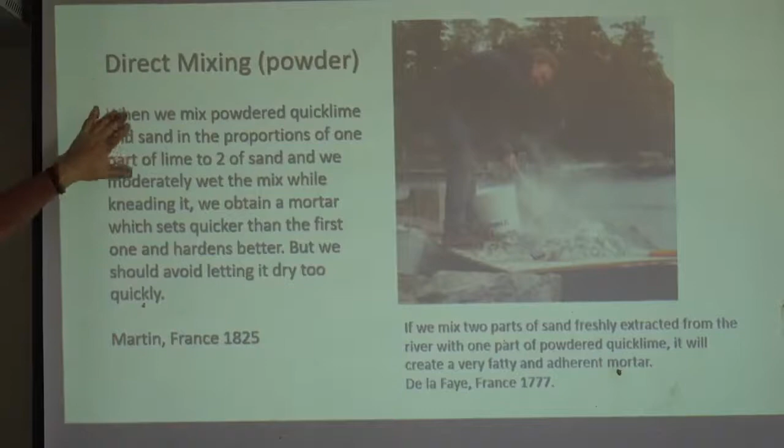There is a version of the ordinary method in Canada on the island. We used seawater to slake, not fresh water. We didn't have fresh water. Alongside other descriptions of powder mixing from France, from De la Faye and from Martin, there is a version of that too, if you like, where you mix everything together from the beginning. You don't need to go through a double handling, but we'll say we're going to do that.

And this one, just a quick one on this. When we did a workshop in Ottawa, I left thinking I needed a bodyguard next time I came, but nonetheless, because engineers rule in Ottawa, but not in a good way. I need one here now, Nigel.

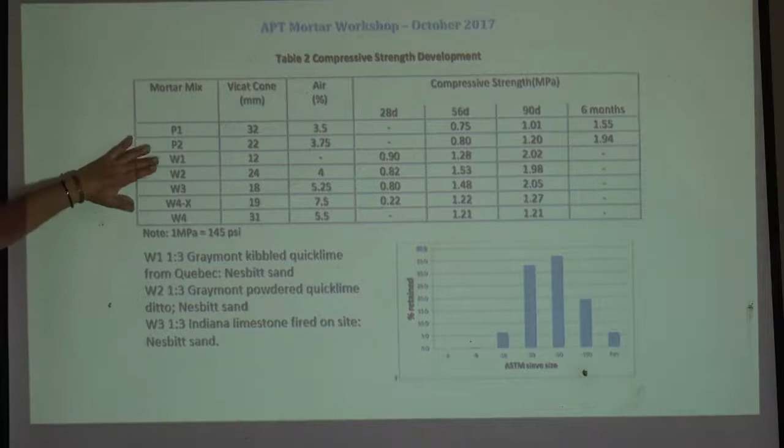So we sampled. We were hot mixing at the workshop, and the National Research Council was sampling those as we made them. These are the three we made, and you'll see that after 90 days, they're all 2 MPa. The one they did, which they thought was hot mixing before we arrived, was sand slaking - they let it all go cold before they mixed it, and you'll see they're coming in at half the strength. So that's a fair indicator. When you hot mix, you're getting twice the compressive strength typically as you might get in a cold mixed mortar.

That's significant, 2 MPa. Who needs more than that? We don't need more than that to build a 10-story building as long as it's solid wall construction. Again, the US Bureau standards are very clear: a 9-story building required a mortar that could be as little strength as 1/3 of an MPa, as long as the walls are solid wall construction. That's the critical thing. So that's just a little insight, and further evidence is showing that.

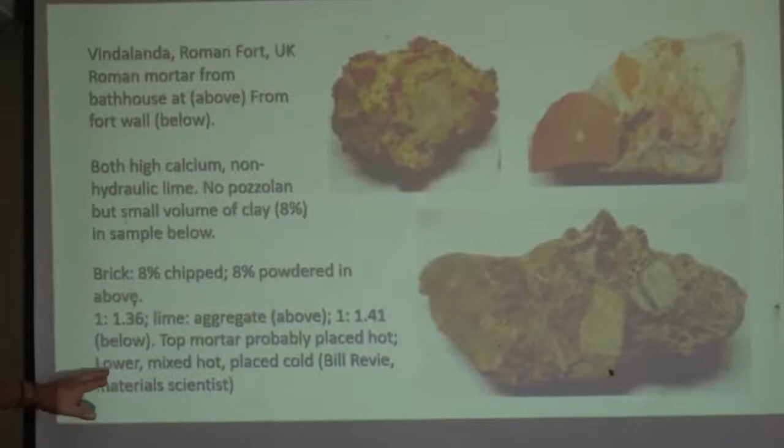This one is a building mortar, a walling mortar, Roman again from the same period, and Bill, the analyst, was certain that was placed hot. That one wasn't - mixed hot, placed, and mixed hot and placed cold. So that one was mixed hot. The pozzolanic one was mixed and then used a bit later. But the proportions you can see, very lime rich, and Roman, of course.

This building is linked in so far as this Anglo-Saxon church tower is built of Roman spolia from the nearby Corbridge Roman fort, so we've got Roman elements in that building. Sadly, the client, the Church Conservation Trust, could only afford to take the cement out of the top half, not the bottom half, but it does give us a nice example because you can see how cloudy that is. That's because that fabric is wet, allowing lichens and algae and moss to grow.

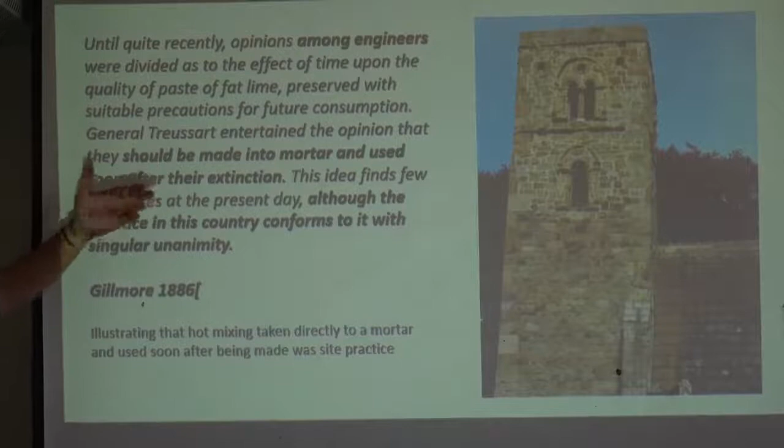Slaked lime is called dead lime, and it's live when it's quicklime. And of course, that's the same in English - quick is Anglo-Saxon for alive. Yeah, Hebrew also has that. It tells us a lot, in that way.

But anyway, that's Gillmore again - sorry, I forgot to give us that. He's saying engineers are saying you should make the lime and lay it down, all these things. But then at the end he says, although the practice in this country, the USA, conforms to hot mixing with singular unanimity. So you've got to be careful when you read text - you often have to read between the lines. He's saying engineers are saying do that, but actually on site, this is what's happening, because it's us that were in charge of that.

The masons are in charge of the mortars. So hot mixes, how do we identify them?

If you've got big fluffy lumps, that indicates hydrate or lime putty, but you'll rarely see that because they didn't use lime putty - they used hydrate, made on site there and then.

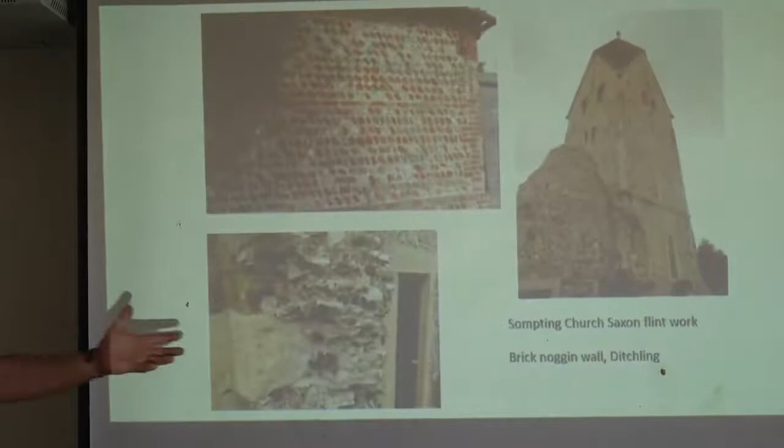The ability to build flint work with a hot mix mortar - it's probably the only mortar you could build flint work with. You've got non-porous nodules, and with lime putty or even NHL you can build maybe 2 courses and then they all start to swim around, so you've got to stop for 2 weeks. Some people actually say that's what they did historically - but of course, why would they do that? With a hot mix you can just build straight up with flint, with non-porous stones, and you do not get swimming. We'll talk about that later, why that is.

A Saxon church, again obviously hot mixes, and little brick noggins as well - these are just half bricks, you know, but it works.

But when we looked inside, on the other side of that wall next to the door, the lime wash was very wet and clearly damp. So we justified what we wouldn't otherwise perhaps have been able to justify - doing a sample panel. In the course of that it was quickly apparent to me, and I'd been working from the inside through the lockdown - it's one of my lockdown hideouts.

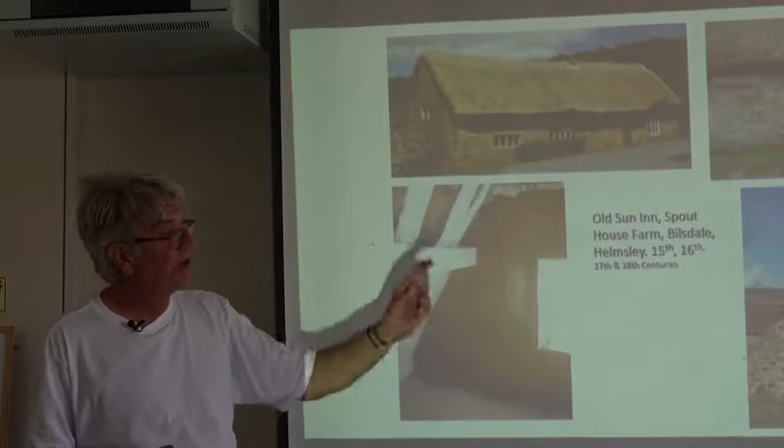So we bit the bullet, and last April I took that out - this is up on the moors, high wind-driven exposure, west facing, so getting all of the rain hitting it. That's just a straight ordinary hot mix, no pozzolan, except a little bit of wood ash, not a lot. The thatch was repaired, and this winter the whole wall is dry all of the time. So that just takes us back to what we were talking about at the beginning.

When I knocked out the cement, the 1:1:6 and NHL that had been used in places subsequently, none of that mortar had made a bond with the stone at all. It's there, and you can see that it hasn't made a bond. So it took me less time to take it out. It's still bloody irritating because it's hard and wedged, but there's no bond. So, simple, that's why the water was coming through the wall every time it rained.

And now we've got a hot mix with a good bond. No water comes through. So I hope, case closed, I hope, and we will get the rest done eventually. And then this is the inside with hot lime washes. Look at the radiance of these.

That's Maria actually, she was helping me, and she didn't know I was going to lime wash the window. So I'd done it, and she turned around and said, oh my God, I didn't know you were going to... But it was lime washed before, and it is again now, and that's that.

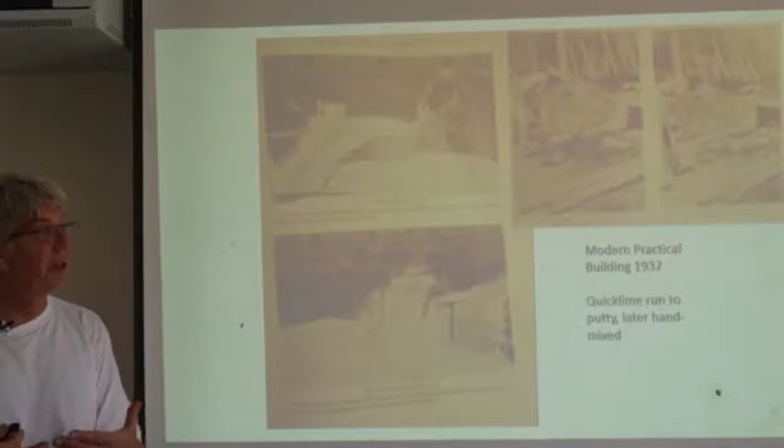And it's still hot because you've got such a huge volume of it to cool down. And I would say they overcame their historic suspicion about its binding qualities, because by this time they were always going to gauge it with Portland cement.

That overcame that. I've done experiments now, and if you make - I actually do it 1:3:8, because Portland cement has got harder and harder, so a 1:2:9 now would be much stronger than a 1:2:9 then. So you amend that: one Portland cement, 3 putty lime, 8 sand, creates a mortar that is as workable almost as a hot mix.

That, I believe, is the real reason they're using lime putty for the first time, because they're getting a material that is very like what they've just stopped using, i.e. a hot mix that's very workable, very sticky and so on, and very lime rich. You know, that's 75% of the binder, and that is lime, yeah? That's probably twice what there is in one of the more lime rich NHLs, twice the free lime.

And that's - I won't dwell there - but that's the scaffolder giving me this oral history, because he was the scaffolder going around everywhere, telling me what they did, based on his observation. And you can see no more than 2 weeks before using it, still hot and dangerous in his opinion, when they opened the pit to use it.

And then the guy who was talking to his granddad about it said, well, what about hot mixing as we're talking about? He said straight away, no, he's a stonemason. His granddad said, no, that's your crowd, the stonemasons who used it like that. This is 1950s Liverpool, yeah? It's not in the mists of time, history.

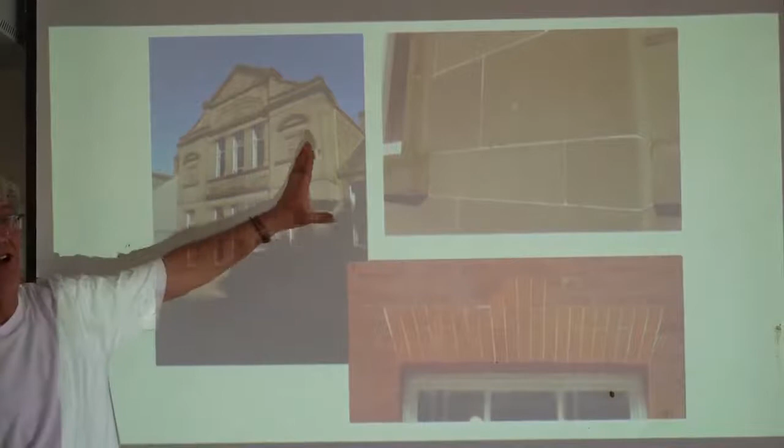So lime putty is used on its own. This is 1893 construction - this is the mortar from 1893, and that's in Scotland, the place where they tell us you can only ever use natural hydraulic lime, but that has proved entirely durable for over 100 years in Scotland, and that's the other place there in gauged brickwork, as we call it.

And here again, but this is Pasley describing the term putty, better known as the cement for fixing window glass. So he feels the need to explain what it is - it's not so common. It's applied to brickwork which is nearly the same as hot lime grout.

It is made by dissolving a small quantity of water, as much hot lime as when slaked and continually stirred up, will assume the consistency of mud.

It is then sifted. So the strategy is not to lay it down for late slaking, it's to actually push it through a sieve to remove those lumps, in order to remove the unburnt parts of the lime, and should be used without delay. So this afternoon you'll see some maybe 20-year-old aged lime putty that we made 2 days ago, if that doesn't sound silly.

And then a similar description, again note, take out the gross, use a hair sieve. If anyone can tell me what a hair sieve looked like, I'd love to know - unimaginable to me, a hair sieve.

But anyway, take out the gross parts of the lime, it's fit for use immediately, and I would say hot use. If you mix a lime putty made like that when it's still hot, the outcome is that's a hot mix method, yeah? It's not what we think. And that's Batty Langley.

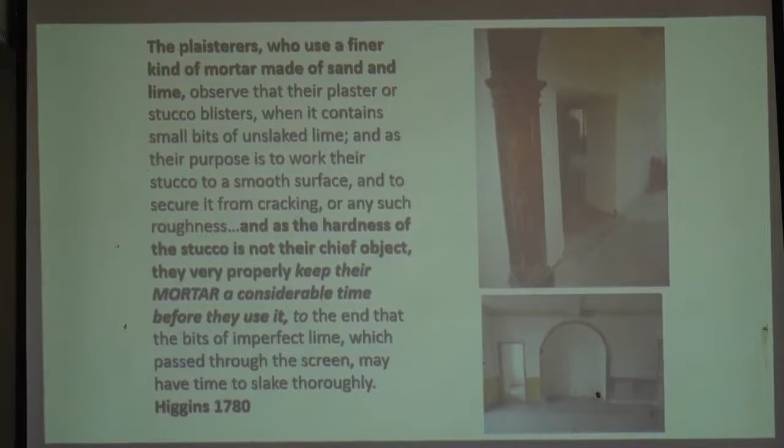make their mortar by the hot mix method and lay the mortar down to allow for late slaking. Again, the method gives the quality, if you have to lay it down for a period. But you'd be surprised that's not usually more - Nicholson is a guy who says, well, you have to lay it down for a long time to allow for late slaking, and then in the next sentence says, so after a week, use it.

So the timescale is different in their world to ours. And so that's just a description of that.

This is another one, but from Miller - this book is biblical in Britain, 1898. He's saying limes which are unsuitable for plasterwork, known as hot limes, i.e. used hot, not mixed hot, but used hot - they have to maybe lay down, sometimes depending on the lime, sometimes 3 months.

There's that figure - I've only seen that twice in history: Alberti in 1460, and this guy. That's the only time laying down for 3 months is mentioned. Why did it say 3 months? Well, it depends on the lime, because it's to get rid of the slaking.

But most importantly, he says that's for plastering, but for ordinary purposes, hot limes are the limes mostly used for building - yeah, everything else. 1898, okay, in London.

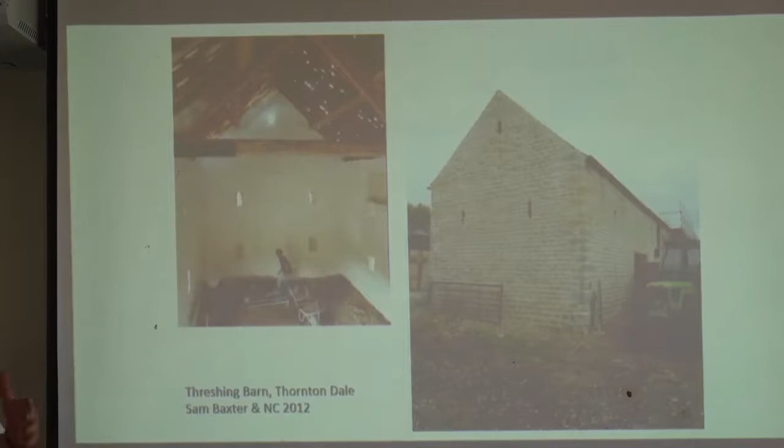Just a few examples: hot lime wash, hot mix mortars. I didn't do this - Sam Baxter, a friend of mine, did, but I designed and managed this for Natural England. Natural England, who are the landscape people, they supported the use of hot mixes right from the get-go and allowed us to build a portfolio of success, if you like, and beautiful work.

That's in my village actually. In York, this is a project we did. We replaced an awful lot of these timbers because they'd been cement rendered and that just caused massive decay.

This is one of the oldest frames in York, 1430, and you can see we've lime washed the whole, which is the traditional way. All the infill panels reinstated with hot mix bricks laid in hot mix, and hot mix plasters, then hot lime wash over the whole.

This is another hot mix job. That's the frame under here, but only under here, is 1316, part of the oldest timber frame. It's a long terrace in York, the oldest timber frame in Britain. This is the only part of that timber frame that has got a compatible lime mortar on. The rest is rendered in cement and the timber frame is rotting. And it is the oldest, 1316 in York. And it's a disgrace. It's a disgrace.

But anyway, the back of it looks like that. And that's hot mix pointed, again done over a really hard winter, two winters ago. No issues with frost. So, hydraulic lime.

Hey, look, we're within sight of the end. Sorry, Maria and I spent 5 hours, well Maria particularly, reordering this talk last night to make sure I could get through it in 2 hours, or hopefully that I could get through it in 2 hours.

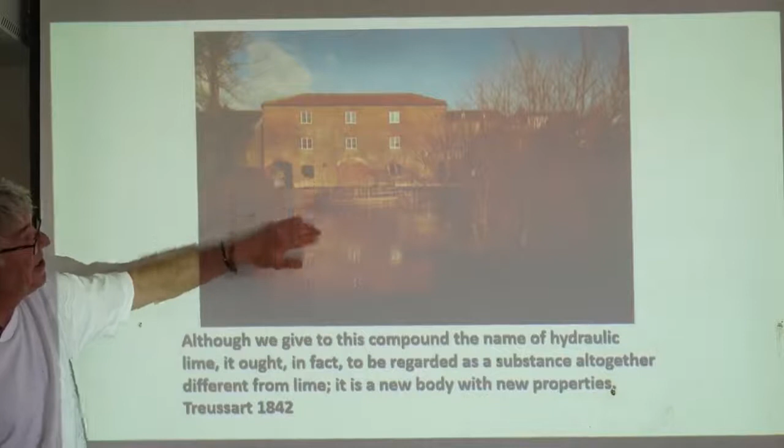Right, hydraulic lime. So this is in Molten, this is the key, historic key. Treussart, a contemporary of Vicat: 'Although we give this compound the name of hydraulic lime, it ought in fact to be regarded as a substance altogether different from lime. It is a new body with new properties.' I wish we'd understood that a few years ago, and he's right.

Robert Boynton again, 1980, not very long ago: 'A major problem confronting most hydraulic lime manufacturers is lack of uniformity in the finished product, namely shipping a lime with a cementation index of 0.92 one day, 0.7 the next, and so on. The chemical analyses of impure deposits frequently change abruptly from one ledge and stratum to another. Blending of stone to secure a composite analysis alleviates this problem to some extent, but can never be pursued with the same flexibility.'

And I have to say, oh, I'm on camera. I shouldn't say it, but I am. Say it - they don't give a shit about that in the industry. It's as it comes today. I mean, sorry, that's the least of my swear words actually.

So, furthermore, the intensive analytical testing that it entails is costly. It does happen in the Portland cement industry, but it's easier for whatever reason. This chronic problem with quality control, more than any other factor, has forced hydraulic lime to lose position primarily to Portland cement and masonry cement.

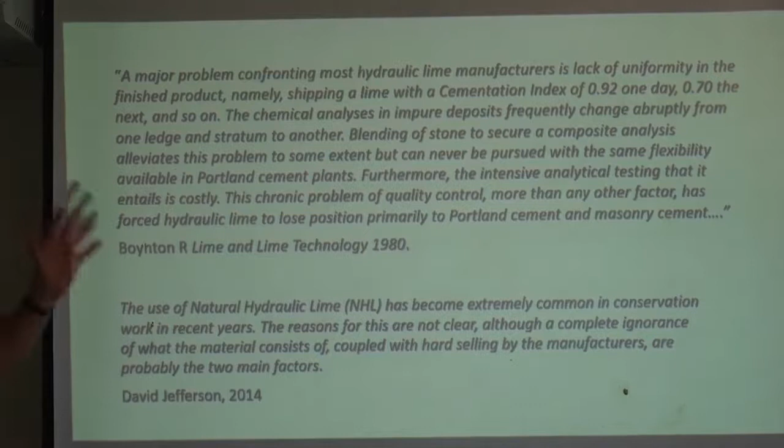This is his opinion: 'The use of natural hydraulic lime has become extremely common in conservation work in recent years. The reasons for this are not clear, although a complete ignorance of what the material consists of, coupled with hard selling by the manufacturers, are probably the two main factors.' And I couldn't disagree with him. He worked 30 years in the cement industry before he does what he does now, so he kind of knows how these things work.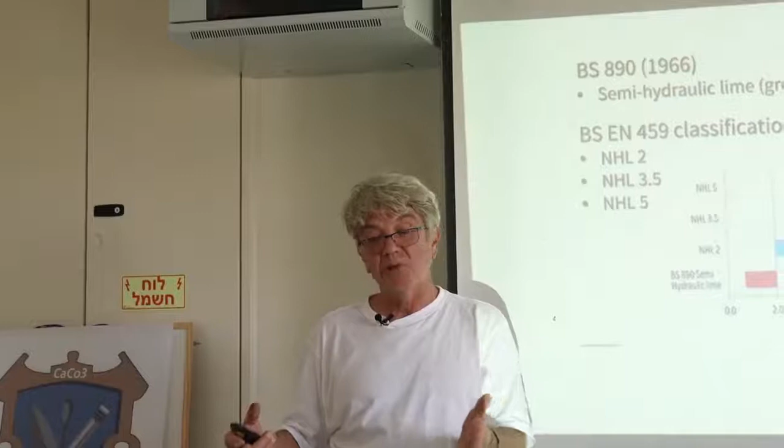But feebly hydraulic lime again, 5% clay typically - the incentive to use that was not strength, because I've seen plenty of analyses from this period where actually with the same sand and everything and the same proportions, the pure lime delivers the stronger mortar. The feebly hydraulic lime is a weaker mortar. But of course it gets there a bit quicker, and critically, as I said earlier, you can make them artificially by putting in 5% of a pozzolan. It had less initial shrinkage - that was the incentive, yeah? Not really that it was more durable or anything else.

This is the BS EN, the European Union standard, which we obviously have adopted, BS EN 459. So this is what we're looking at. Now this is a false test, you know, it's done by weight. It's done with a sand you would never use, but it's again one that can be reproduced in every lab in Europe easily. So it's put into just random bag numbers, because of course all of these fit in this overlap.

So they're all to standard, whatever strength they are. Historic England are very clear: this standard is utterly unfit for purpose. It tells the user absolutely nothing. This is for producers, to make sure they're making it.

And the other thing is, on test, a lot of these don't even reach these strengths after 28 days. In reality, when you make a real mortar, they don't. It's only in the lab when it's done by weight. So it's all weird and it tells you nothing.

However, Historic England tested all the ones that we use, made a real mortar with real sand at 1 to 2, the leanest proportion NHLs would ever be. This is the air lime control made with lime putty, sadly, instead of hot mix. I think the hot mix one would be up here, but still flattening and so on. So I think you can see there's an issue here, that every single brand is a different strength on this day. That's the only flaw in this research.

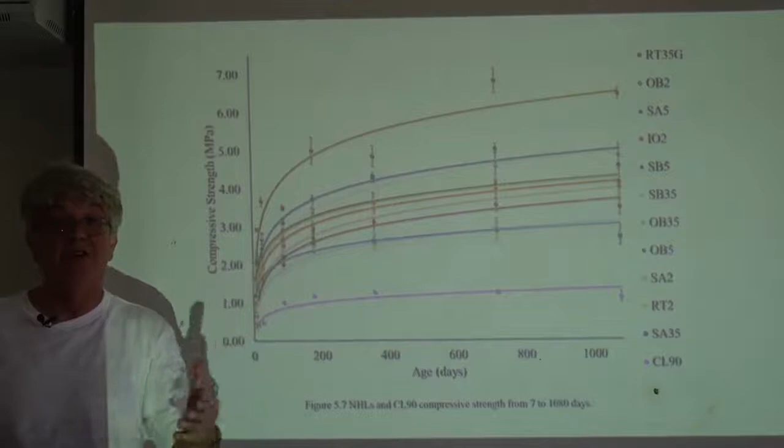The simplest research, a little project they did, as an example: they bought 2 bags of the same natural hydraulic lime, same number, same producer, same brand, in 2 different parts of England on the same day, had them tested in 2 independent labs. In both cases, the result was that one of them delivered a mortar that was 30% stronger than the other. So that's the extent of variability within the same source.

But then you move out and look at the variation between different products. The lowest, the weakest, is an NHL 3.5, St. Astier. The strongest, right up here, is also an NHL 3.5, Round Tower. It's not a 5 and it's not a 2. And all I'm trying to show you here is this variability - why would an architect say use this particular brand, this number, it's NHL 3.5?

And in fact, in the UK, the cheapest are the worst. One of the cheapest is the Secil from Portugal, 3% free lime. They're even breaking the standard. The standard demands a minimum of 15% free lime in a 5, 25% minimum in a 3.5, and so on. What you do find in their product, in their NHL 5, is 15% limestone dust. Well, natural hydraulic lime by definition, you don't add anything to it.

15% limestone in their NHL 5, 25% limestone dust in their 3.5. Again, exploiting ignorance about what free lime is. Free lime is lime, not limestone dust. And they get away with it. A recent analysis that just looked at the free lime, I saw 3% free lime. It's a natural cement, which they're seeking to mitigate, to make it look like otherwise. And that's the most commonly used in Britain, it's around here somewhere, Singleton Birch. It goes under an English brand name and the Portuguese brand name.

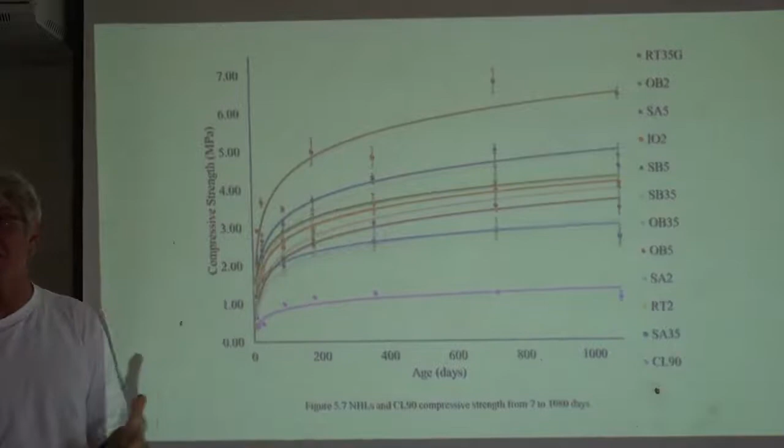And interestingly, Vicat, the Prompt, which is not a natural hydraulic lime, it's a natural cement, but essentially the mineralogy, the ingredients are the same, there's just no free lime left. They cure their samples, that they develop their technical data from, underwater for 6 months. And then they test it. I would actually argue that these materials can only get the hydration they need to really set properly underwater for the first period of their set.

It's not enough to spray them for a couple of days, believe me. The likely consequence, as we see in Britain, is that a mortar that looks set on the face, dig in, it's not mortar inside, it's powder or mush. It's certainly not mortar. If they set fully properly, they're going to be far too hard and far too little capillary active to keep the building dry. If you don't do that, they're not a mortar that can get rid of moisture, they just let it in, and it builds and struggles to get out.

So I hope that's shocking to everyone in the room. The other thing to say is, yes, we've got 6 months of maximum period of strength gain, but then we've got steady climbing curves, typically gaining half an MPa every year. That's half an MPa gain in strength, and a lowering in the porosity, a densification of the pore system.

That's what's happening. So sometimes when first pointed, the building doesn't look wet. It maybe takes a year or two for it to start to build and build. And as I've shown you, after 20 years, we're in trouble. We really start to see the consequences. By which time it might be too late for a limestone that's been having to do all the work and collecting salt in its arrises. They're going to powder away.

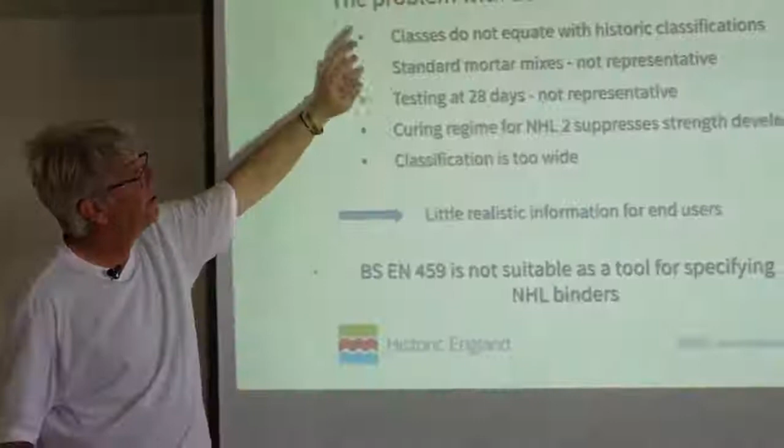So this is the Historic England position on this with the standard. There's no equivalence between the historic classifications. Standard mortar mixes are not representative. Testing at 28 days is not representative. The curing regime for NHL 2 suppresses strength development, although you'll see in a minute most of them, their NHL2 is their strongest mortar. The classification is too wide. There's little realistic information for end users. BS EN459 is not suitable as a tool for specifying NHL binders. That is the position of Historic England: this standard is not fit for purpose. So anyone who uses standards as a comfort blanket - this is not a comfort blanket, it's full of holes and you'll get very cold. Sorry, I just made that one up, but anyway.

So a bit more detail here. This is over time, but you can see they did 1:6, whoa, 10 MPa, 1:2:9. This is the pattern, and the BSA standards identified this too: cement lime mortars reach the maximum and then their strength drops. This is after 3 months - they've reached maximum strength after 3 months, typically. These are metakaolin gauged mortars, CL90, air lime with metakaolin, and you can see their strength there. Look, blimey, there's none - the NHLs are all stronger than that, that's the point we're making.

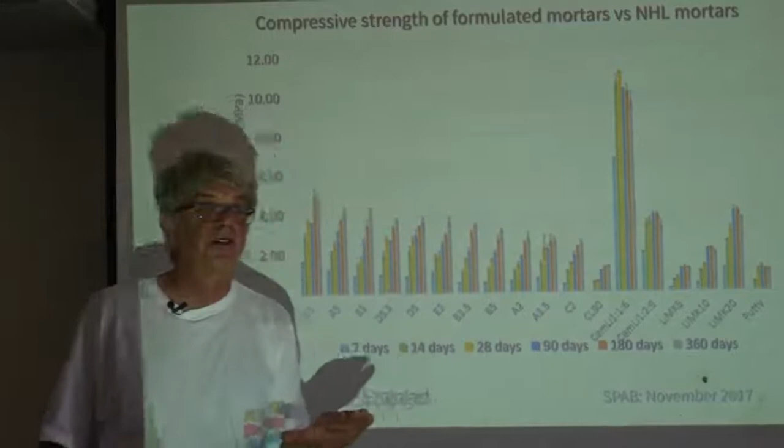And this is all, obviously you're going to get this slideshow, but this is only after a year, bear in mind. At that point, the 1:2:9 comes in at about... oh no, it's 2 there, oh I'm wrong about that - that's the metakaolin mixes, sorry, I'm getting confused. That's the ordinary air lime mix, this is where I'm at. This is the 1:2:9, and yeah, it's stronger than most of them. After 3 years, it is not - it's weaker than most of them because they're continuing to gain strength. And 1:2:9, I would say, is too strong.

Treussart, again: we are much more certain to obtain uniform results with hydraulic mortars composed of fat lime, sand, and trass, brick, tile, whatever pozzolan, than those we can make of artificial or natural hydraulic lime and sand only. So this belief that it was more reliable and more predictable - and I won't dwell there.

And then if we look to the river walls of the Houses of Parliament, Barry the architect - the hydraulic materials he's using there: 1 measure of the best burned feebly hydraulic lime, that is maybe 4%, 5% clay, 1 measure of finely ground genuine Italian pozzolan, and 2 measures of sharp above-bridge sand.

That is the water lime being used on the Houses of Parliament in the 1850s, 1849 I think. But anyway, it's hot mixed - he makes that clear as well, as with the other mortars.

With pozzolans, it was really John Smeaton who first understood that it was fired clay that gave this reaction - no one knew before, they just knew they set underwater. So typically the whole of the aggregate was trass, as we saw with Batty Langley at the beginning. The whole aggregate is pozzolanic, but you're wasting money.

There's only one part pozzolan by weight that will combine with two parts of lime, and then that's it - no more combination, so the rest is aggregate. So Smeaton made it his business to go around identifying the pozzolans available. These were known already, but they didn't know why they worked: pumice, volcanic ash, pozzolan from Mount Vesuvius, trass, volcanic ash, and minions, which is calcined ironstone.

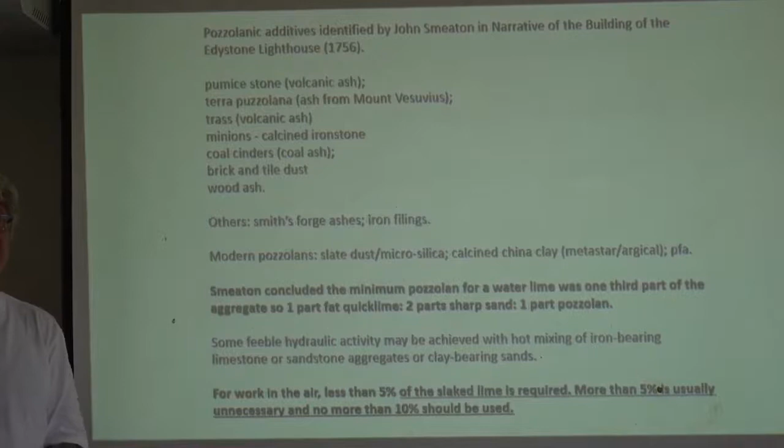We have mortars made with that on the North York Moors where they're burning ironstone. The aggregates are just the waste from the kiln, so you've got everything mixed in - calcined ironstone, fuel ash, and so on. And they don't make hard mortars - this is the point. They make mortars you can snap that are quite openly porous.

Not that one in particular, I mean. Coal cinders, coal ash, brick and tile dust, wood ash, smith's forge ashes, iron filings - and yeah, that's true, I've seen elevations full of little orange rust dots. They just used iron filings as a pozzolanic addition. That's where blacksmith's forge ashes come in, a mixture of fuel ash and iron that's been beaten out of the iron.

So modern pozzolans - we've got slate dust, microsilica, calcined china clay, metakaolin, and PFA. Leaving aside that one, these are typically 89% more powerful than traditional pozzolans. So bear that in mind - they're very powerful compared to traditional pozzolans.

What do you mean by powerful? Well, their hydraulic energy is 89% more - 89% more hydraulic energy in the modern pozzolans. So they'll make a harder mix and maybe get there quicker, but is that a good thing? They're more energetic, as VK would say.

And then Smeaton was the one who said, okay guys, you're wasting your time and money using 3 parts of pozzolanic material to 1 lime. You only need 1 part quicklime, 2 parts sharp sand, 1 part pozzolan. He didn't know the chemistry of it, but he was absolutely right. There's no point - if you want your mortar to set underwater, 30% of the aggregate should be pozzolan, and that will leave no free lime if it all combines - won't necessarily, and so on.

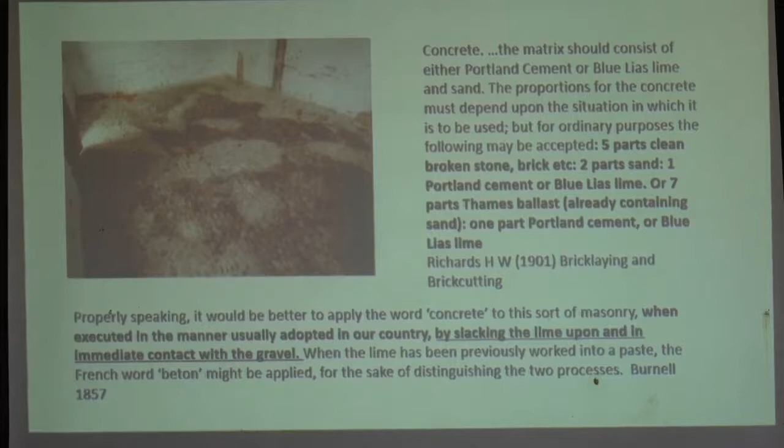Again, Lincoln Castle, this is a new build. The architect was thinking, oh it's great, lime's breathable, we don't need a damp-proof membrane, because it's all breathable, it's NHL. This isn't just salt on the surface, this is powdering limestone, and this is 2 years after build.

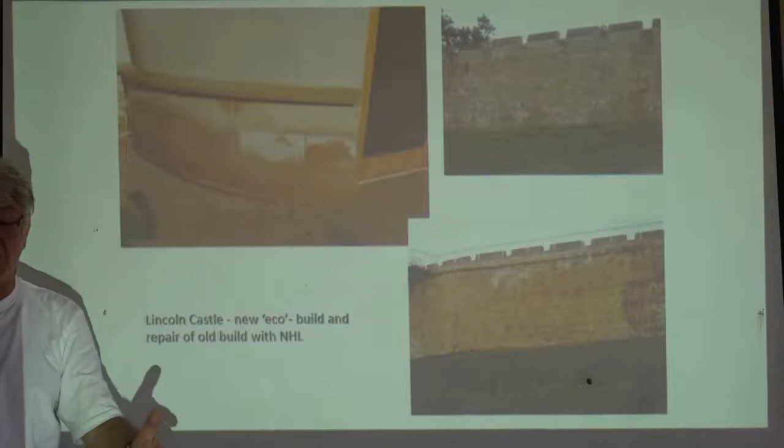You go inside where they put a limecrete floor, and a limecrete floor made with NHL is not breathable, okay - don't think it is. Even the Historic England document about floors from 2012 says if you're using NHL or cement to make your floor slab, you do not need a plastic membrane, because nothing's going to come through them - so they're the membrane.

So that's happening, and inside the walls are just bursting apart with salt and so on. This is the curtain wall of Lincoln Castle. It's saturated, pointed with NHL 3.5, at a cost of maybe 1.5 to 2 million quid. I might be exaggerating there - 1.5 million quid for the curtain wall of the castle. Not only is there bleeding from the NHL, that wall is permanently saturated. The only dry bit of that wall is the medieval core that's exposed, which they didn't point.

This is a constant hazard in what I'm doing. I use this slide, made these points, and the architect who specified the work was sat in the audience. But instead of coming and punching me in the face, he came afterwards and said, I know, what do we do? He said now every winter they've had to employ a bloke every day to walk the perimeter wall and pick up all the stone faces that have dropped off in the frost overnight. This is disastrous - £1.5 million quid.

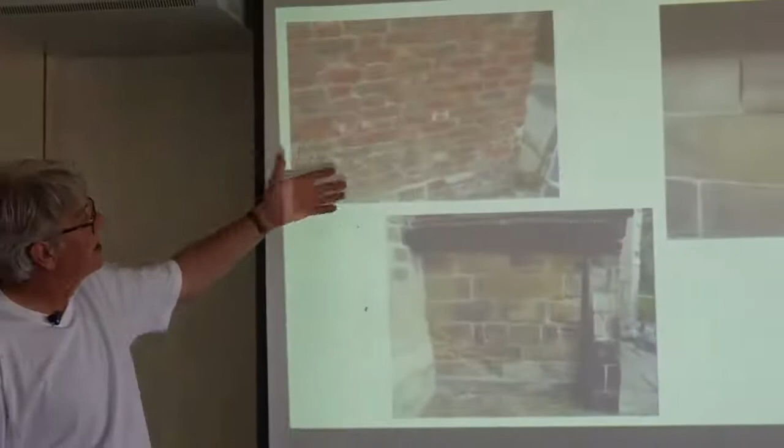So anyway, those are those issues. Again, this is NHL - we've got the bricks taking the salts, not those.

This is a job we did in York - Holy Trinity, but not the medieval porch. As you can see from the erosion that had already happened, a heavy salt burden had been pointed with cement. So when we first pointed, we didn't use white mortars. All the salts are being drawn into the mortars and sitting on the face. In extreme salt contamination, those mortars might go friable quite quickly. However, now some years on, the mortars are still there, the salts have all gone. That is the job of the mason - if, as I say, in an extreme case, it's meant to fail in preference to the stone, that's the job. But actually, in most cases, they won't - they'll just get that salt out, and so on.

This slide has persuaded more architects than any other in the world. But sorry, I think we should - yeah, I'm aware certain times they are closing the park. Yes, no, I'm very, very nearly there. Believe me, just a few more, but that one.

This is NHL 5, and that was how it was, and that is 2 weeks after repointing it with a hot mix. That sold more architects than any other slide, I have to be honest, because they're still NHL 5, and this one was taken after 24 hours of rain on that gable that had stopped about an hour before. So, yeah, and then I'll just skip through.

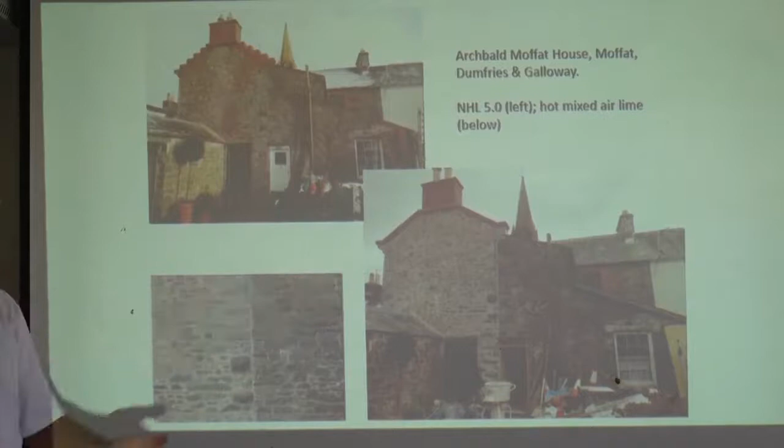Just a warning on gauge mixes. Way back we did this church in 2001, just when we started - my boss saying right, we've got to use NHL. I wasn't happy, but so we did half NHL 2, the weakest you can get, half lime putty, 2 limestones for more porosity in the aggregates, 4 sand. This is 20 years later, where there had already been a heavy salt burden, but that has not behaved sacrificially. A mortar which I would have thought was pretty high in free lime, and the stone has continued to erode. So a word of caution about gauged mixes, because it doesn't avoid the ongoing strength gain in the NHL component.

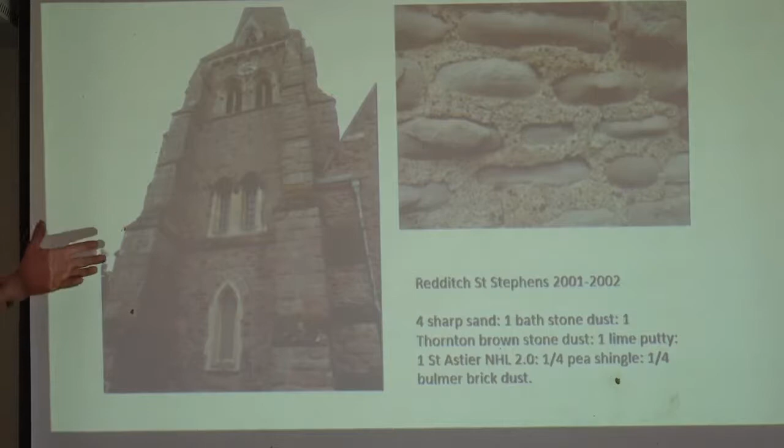And that building there, as a whole, is a wet building. It wasn't wet when we started. When I came back, I went through my report - it was actually dry, and it probably, in retrospect, had been pointed with a cement lime mortar. So just very quickly, cement lime mortars, I'm not going to dwell - where's the damage? Where's the absence of sacrificial behaviour?

Right, put that somewhere safe. I mean, I'm not sure it'll survive—I haven't got somewhere safe. Yeah, down there, between those things, that'll do. That's a traditional storage place. I'll try and hold it, but that's usually it on the shelf.